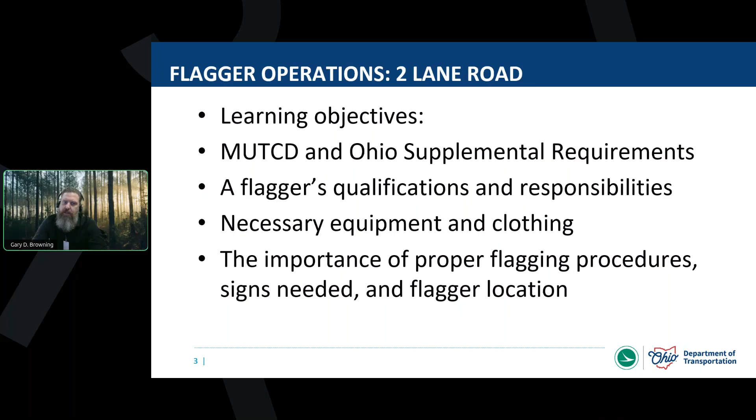All right, today's learning objectives. We want to take some time and we want to look at the MUTCD, the Manual on Uniform Traffic Control Devices, as well as our new Ohio supplemental requirements as it pertains to us working in the roadway during flagger operations. We'll spend some time talking about the flagger's qualifications as well as responsibilities, looking at necessary equipment and clothing that would reference our PPE, and then also the importance of proper flagging procedures, the signs that are needed, as well as proper flagging locations.

We'll look at uniform flagging procedures and how they are applied depending on the type of operation that's being performed. We know that many times in our local public agencies, our two-lane road work can vary from things that are going to be static in one position for a length of time, and sometimes it even moves into moving and mobile operations where we're still deploying flaggers for safety of the road work area as well as the road users.

So we need to have an understanding that there's going to be different things that apply as far as keeping everyone safe. And with that, we want the development of safety habits to maintain safe working conditions for our employees and our motorists around and through our work areas. So with the PowerPoint, hopefully you'll get some insight in how you can help design your flagging operations to be the safest that it can be for different speed limits in your municipalities.

All right, so here we're going to reference our Ohio standards in Part 6 of the MUTCD. The MUTCD and the Ohio Supplemental Manual establish the standards for design and use of traffic control devices on all public roadways in Ohio. And this is going to be per sections of the ORC 4511.09 and 4511.11.

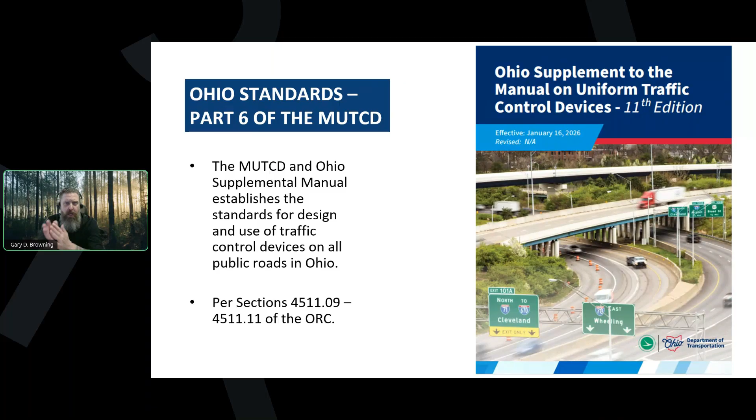As a reference too, we have these manuals available to you for download, and I'll show you that here in just a moment. To reference the ORC, local authorities in their respective jurisdictions shall place and maintain traffic control devices in accordance with the Department of Transportation manual and specifications for a uniform system of traffic control devices.

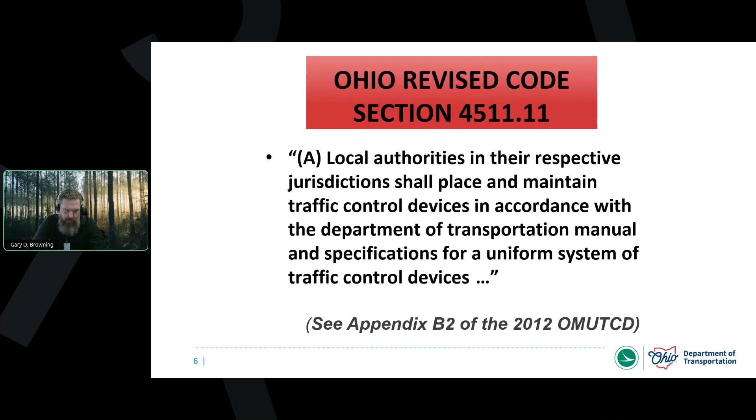One of the biggest things that I have learned through 30 years of local public agency experience is that the big word that's important in there is uniformity. Being able to have uniform work design so that we are all following in compliance with the manual on uniform traffic control devices. So that if somebody is driving through your work zone in your community, and if you drive clear across the country, every work zone that you go through should be the same, to develop the standardization, the uniformity, the control efforts, so that motorists know exactly what to expect, and prayerfully the workers will be able to communicate effectively so that they'll know what to expect.

Within the manual on uniform traffic control devices, there are going to be pictures that are available. These pictures are commonly referred to as typical applications. They're going to be a drawing on a page. They're going to show many different typical applications for all types of work zone environments that you might find yourself in. Anything from single lane, two lane roadways, multi-lane roadways, freeways, and expressways, all in an effort to give you some sort of a plan and an understanding, so that as you are beginning to build your plan for your work zone, it's a starting place for deployment. From there, you're going to start making different types of alterations.

As you look at typical applications, there are going to be many variables such as the location of work, the highway type, geometrics of roadways, vertical alignments, intersections and interchanges, and all the different things that are available. And so one thing we've got to realize is that when I'm looking at a drawing on a piece of paper, it's not real life. And because it's not real life, there's sometimes going to be a necessary alteration that has to be made. What we want to do is to know what the manual says, so that when we're making alterations, our alterations do not put us in a situation to become a violation.

And we've seen that happen many times, unfortunately, throughout the years, where somebody makes an alteration to a work zone. However, the alteration that's made puts them into a situation where there's a violation. One of the ways that this happens most frequently, sadly, is with retroreflectivity of temporary traffic control devices. Let's say that you have a local public agency that sets out to do work during daytime operations. They put all their signs out, perfectly and legally. They put out their taper, they put out their tangent lines, they've got their workspace and buffer space, and everything is exactly specific to what it's supposed to be.

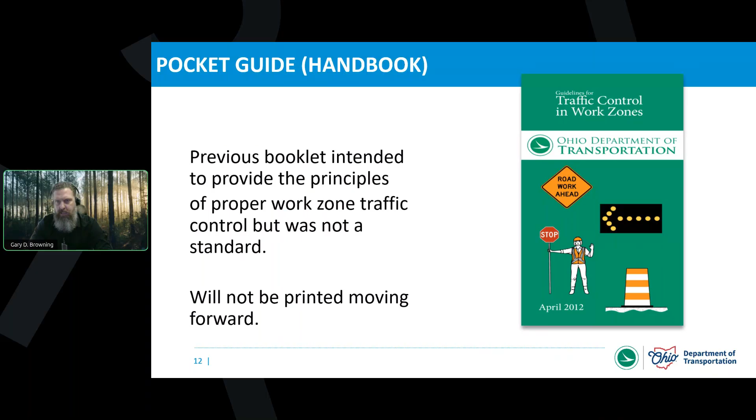This was a nice option, but we've got something that's going to be even better that we have improved, because like with anything that's printed in paper or a little flip book that's going to be in a truck, we know that it stands the chance of being damaged, lost, or stolen. So we've provided a digital resource that I'll talk to you about here in just a minute. So just be advised that these will not be printed moving forward, and the links to be able to print them as well are going to be removed from the website.

But within the book, what we had previously and what has been moved to a digital copy now is devices and tables to show us the different spacing that we need for signage on roadways depending on speed. All the calculations are already done for spacing of channelizing devices, as well as laying out tapers and flagger station distances, so very easily you could look at the speed of your roadway, look at the width of the lane that you're working in, and the mathematical equations were already done for you.

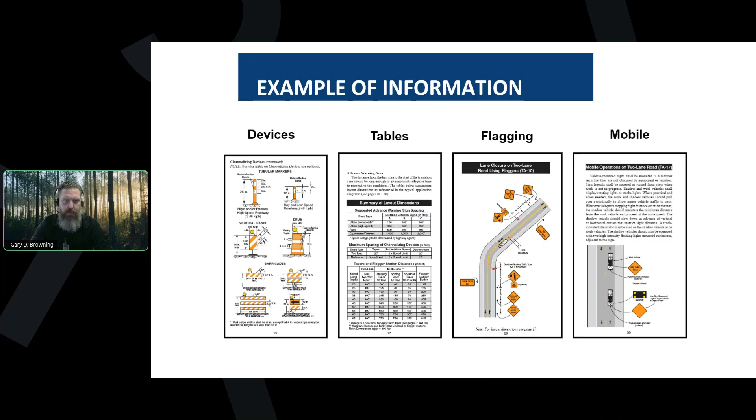Other typical applications were available in this booklet as well. You also had work activity matrices. So if you still didn't know what typical application you wanted to reference, you could reference them based on the work type, and it would show you what the best typical application would be.

There are many apps that are available out there. Because we're talking about work zones and flaggers, this is the one I'm sharing with you now. But we have other ones that are available. One's for sign placement, one's for safe roadways. You can get into the Ohio Department of Transportation's website. They have apps that are available to download. And there are still even more out there. Underground Utility Protection Services have an app. The railroad has an app. These apps are great to put on employees' devices, either a city provided or government provided phone, or even a personal device, because it's always going to be with you, helping you stay safe and informed when you're out there working.

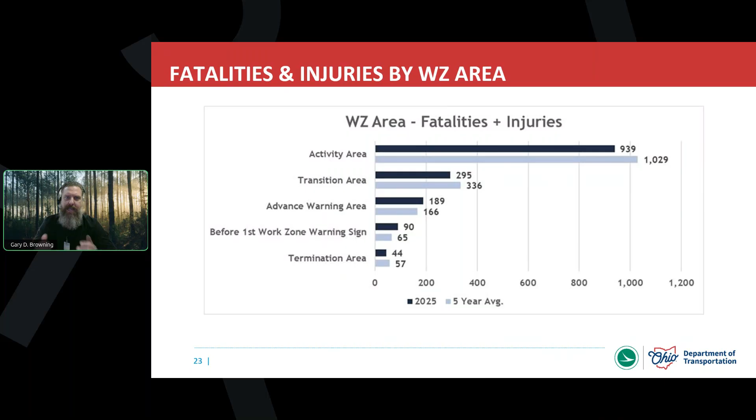We want you to be safe, but remind them to have situational awareness so that their head is basically on a swivel. They're listening, their ears are open, and they're ready to take action to protect themselves, to have an escape route, to be able to get out of the way should an errant vehicle come through the work zone and potentially lose control. It's sad to say, but this activity area is where the majority of these incidents are being recorded.

So what is the main hazard for flagging? We know that as we look across the country, motorists kill about 20 flaggers each year. This is an average number. It's not an exact number, but it should still be a staggering number to us, to remember that this is a very dangerous thing that we're doing. We have got to make sure that we're doing everything appropriately.

Flagging can be very dangerous, especially when you start working with high-speed traffic. You're dealing with angry and aggressive drivers. And there are other things on the roadway that drivers are dealing with, which we'll talk about later in the presentation. After seeing a flagger, a motorist going, let's say, 60 miles an hour is going to need almost 400 feet to come to a stop. So many times, speed of vehicles plays a role in potential accidents happening. So we need to do our best to be safe on the roadways.

For this particular presentation, I went to the website and I pulled out not only what the total crashes were in our state, but also the crashes being recorded as work zone related crashes. So something very interesting if you would like to take the time to go back and have a look at that.

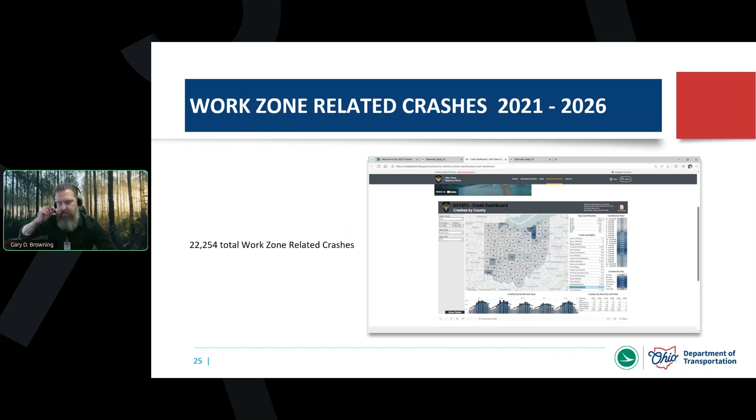All right, let's talk about one crash in particular. If you're aware of who PERRP is, PERRP is the Public Employment Risk Reduction Program. They're basically OSHA for the local public agency. They're going to be imposing the Code of Federal Regulations for different workplace violations. PERRP and LTAP have worked together quite frequently in an effort to get safety, communication, and training out there to our local public agencies.

They were going out to do what I believe was crack sealing, some form of a road maintenance repair. And take a look at the dynamic of the roadway. You have a roadway that has curves to it, it has hills and dips. You have a canopy of trees that's overshadowing the roadway, immediately met with blinding sun.

The crew that was going out to do the maintenance efforts of that roadway, it was maybe a relatively short section of road. They thought, hey, let's just get out, let's get after it, let's get it done so that we can get back to the shop and maybe get on to the next task. So at one end of the roadway, they put up one sign. At the far end of the roadway, they put up another sign. And then they proceeded to have a moving and mobile work zone, if you will, as they went down the roadway doing their sealing project.

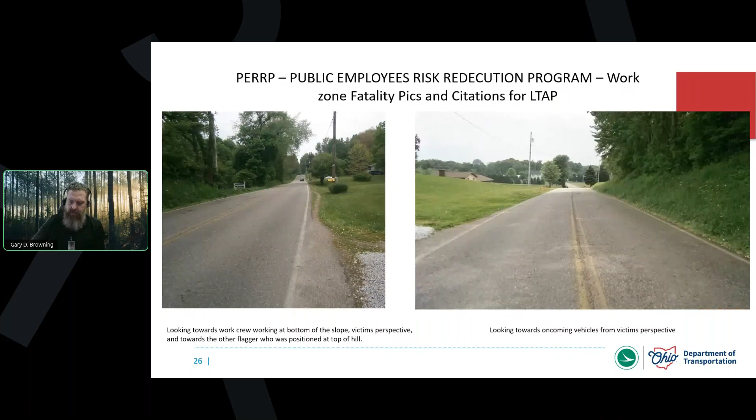So PERRP gets involved and PERRP begins to do their investigation for exactly what happened. As they look into the investigation and they're documenting everything that was reported and how it happened, we start looking at the citation number. We start looking at all the references that were made. And every reference at the time was still the Ohio Manual for Uniform Traffic Control Devices, the OMUTCD, but the same thing is still going to apply today. They're going to go through that federal manual. They're going to go through the Ohio supplemental, and we have to do our part to make sure that we are upholding these things for our roadways anytime that we're in the road working.

As you look through the citation, you'll see the Code of Federal Regulations that is also being quoted, and you'll see what their findings probably were. And so we have to know that it is very important that we have trained employees that can work and be competent persons while they're out working in the roadway, so that everything is safe and legal to try to prevent these disasters from happening.

And this is not to put any shame on any local public agency, such as this one, who had to experience such a hardship, but it should be a reminder to all of us that this is something that is very plausible. This is something that can happen to every single one of us if we're out there and we're not doing what we're supposed to do and we're not staying alert with that situational awareness. All right, let's continue moving on.

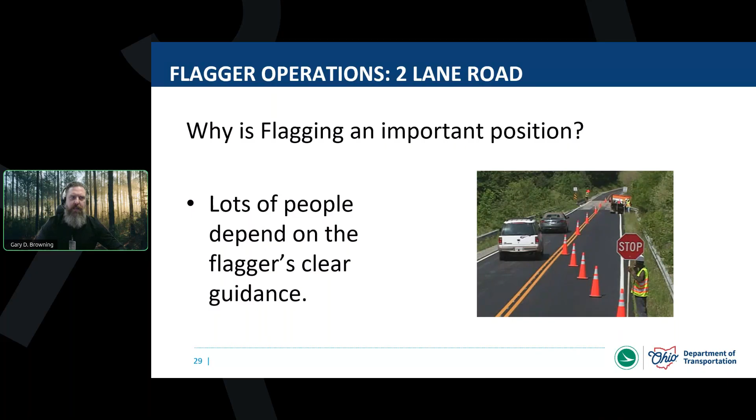So we know that flaggers are going to be very critical to traffic safety, and the consequences of improper flagging may be severe, if not fatal, like we've just discussed. Flaggers have very important responsibilities. Why is flagging an important position? Well, the fact is that lots of people are depending on the flagger's clear guidance. So let's think about those people. You've got the co-workers that are working in a workspace. They're trying to perform whatever the maintenance or inspection operation is.

The flaggers are controlling the roadway. The fellow co-workers are relying on the flaggers to have proper control of that roadway and communication. The motorists that are driving up the roadway are relying on the flaggers' clear and concise communication to keep them safe, to let them know that it's time to stop, that they need to slow down, or that they can be released to travel past the work area. And then we think about all road users, including vulnerable road users, such as pedestrians, such as bicyclists. Many of our communities have the e-scooters and the e-bikes.

And lastly, and not to say least, the flaggers themselves. The flaggers are relying on one another. It is absolutely critical that we make sure our flaggers are trained. The problem is, and I have found this throughout my 30 years of experience, that many times the maintenance road members do not like to flag.

So the fellas and the ladies that have all the experience, they have the wisdom and years and training, they choose that they don't want to flag. So then who gets stuck flagging? Well, typically it's going to end up being that new person that just got hired in that may not have even been trained yet. It's going to be that college intern. It's going to be that summer seasonal. It's going to be that brand new full-time employee. They're going to get handed the flag paddles and say, you're going to be the flagger because you don't know how to do this other part of the task just yet.

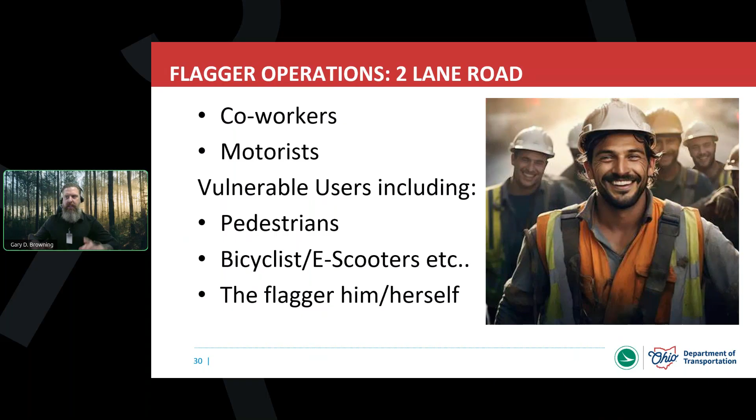And we have to understand that we are in great violation by doing that, because just look at the fact that we're all relying on them. If I'm in that work area, I am relying on those flaggers for my own safety. And if that flagger that I'm relying on has not yet been trained and is not knowledgeable themselves, now I've put myself at risk. So let us make sure that we see the need to do that, that flaggers absolutely must be trained.

Now, as we take the time and we go through and we look at our Manual on Uniform Traffic Control Devices and we look at the flagging procedures, we're going to find those standards. And there's many things that are going to be bullet pointed in there. So let's just take a moment to look at some of these and what a flagger must be able to do. So we know having flaggers out there and following these procedures is going to increase motorist respect. It's going to promote a uniform response. Remember, we talked about when we read through that Ohio Revised Code. It's that standardization. We want that uniform response, and we want to do our best to try to minimize drivers' confusion on the roadway.

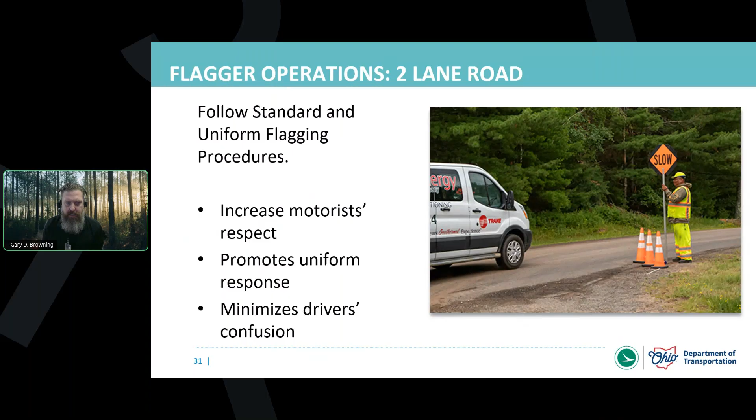Flaggers must stay alert at all times. Flaggers must face oncoming traffic. They must be highly visible. They must stand alone, and they must stay on the shoulder. They must stay out of the path of other vehicles. Now, you can probably admit there's times that maybe you've been driving down the road and you've approached a work zone and you've had flaggers that were controlling that roadway, and you probably have seen almost every one of these things being violated. And that's the problem. Those are the things that we've got to communicate to our workers so that they're not.

They've got to stay alert at all times, being in control of that roadway. It's very easy to get complacent, especially maybe on a roadway that has low traffic. And so their mind starts to wander and they're looking around at the environment, but you have to stay alert. Many times we'll find flaggers that are standing at different locations on the roadway and not necessarily on the side of the road where they're supposed to be at, not facing the oncoming traffic. Maybe they're out there and they're not wearing the proper ANSI garments for that roadway. We're going to talk more about that with ANSI Class 2 and ANSI Class 3.

Or we'll find our flaggers that they'll be standing right up with that work area. They'll be standing right up against a pickup truck or whatever type of mobility vehicle that they use to be out into that work zone. The flagger has to stand alone so that they are completely separate and being visual and being seen. They must stay on that shoulder and they must stay out of the path of the roadway from that vehicular travel.

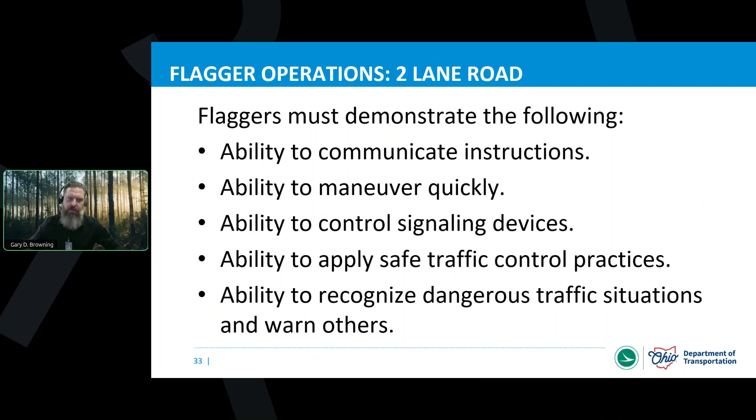So why would we take a brand new summer seasonal, a college intern, that brand new full-time employee that has not yet been trained to have a clear understanding of flagging operations in the MUTCD, put them out in the roadway to control that roadway when so many people are going to be relying on them for their safety as well as the flagger being safe. I hope that you're starting to see the importance of why we have to have proper flagger training.

When we start talking about flagging equipment, primarily we know we're talking about our stop and slow paddles. So you have stop and slow paddles that need to be retro-reflective, especially for anything being used at nighttime. Now there's two sizes of paddle that's available. The minimum size that you can use is going to be an 18-inch by 18-inch.

There are larger paddles that are available, such as the 24-inch by 24-inch, and typically these are going to be mounted on a high rigid handle, usually 5 foot to 7 foot high. The manual would say that, the sign being mounted to a post support, it needs to be high enough so that the approaching vehicles can adequately see it so that they are getting that communication.

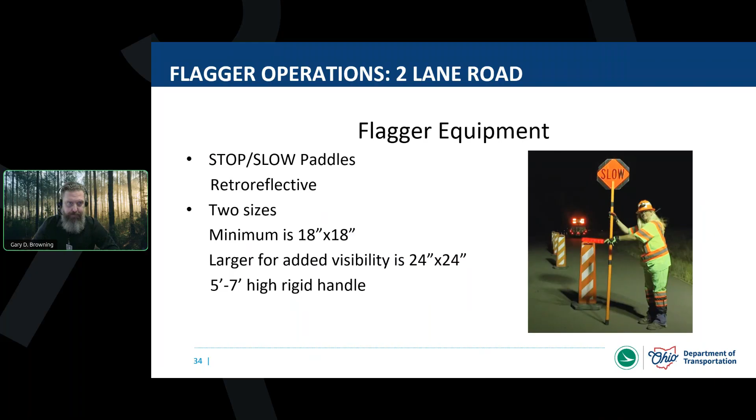When we look at our stop and slow paddles, because we were talking about uniformity and standardization, notice the stop sign. This is a regulatory stop sign. It is an enforceable stop sign.

So I always tell my folks that if you're out working and you're having problems where the motorists in the community are not obeying the flagger controls, they're not obeying the stop sign, to make a phone call to that local public agency, the police department, maybe the local sheriff's deputy, and ask if somebody can come by and maybe just sit adjacent to that work zone, because this is absolutely a regulatory stop sign.

Now look at the uniformity and the standardization of the slow side. It's going to match up just like all the other requirements that we will have with our temporary controls and our advanced signing. So you have that orange diamond, you have the bold black letters, all in an effort to be as visual and communicate as clearly as possible to motorists.

Well, what about using the old school flags? Many of you may have some of these still laying around. You may still be using them, but here's what we find with our update, with our new manual. The use of these flags should be limited to emergency situations only. We need to start making the effort of operating with stop and slow paddles alone.

How about channelizing devices? When we start talking about our channelizing devices, we're primarily talking about anything that we're using to help us control that traffic. So this might be your cones, you might be using grabber cones, you might be using some form of a panel or a barrel. But our channelizing devices direct traffic from one lane to another. They guide travelers along a safe path.

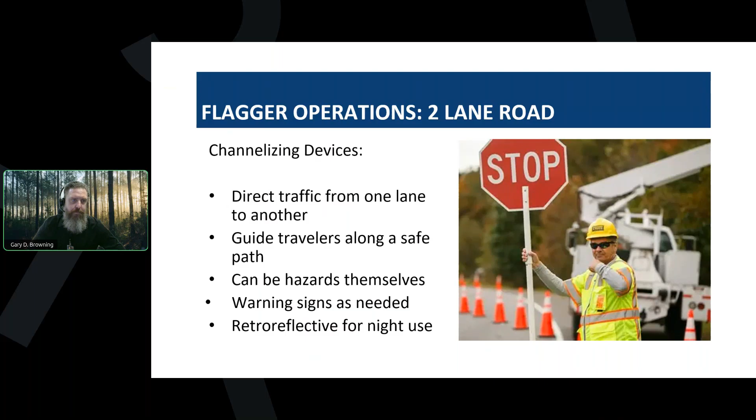Now a long time ago, it used to be known as ANSI Class 1, ANSI Class 2, ANSI Class 3. Well, now the previous ANSI Class 1 is no longer permitted to be worn in or around the roadway where there's vehicular traffic. It's only allowed to be worn indoors or in controlled environments.

So now what it's considered is a non-rated. A non-rated article of garment is no different than you wearing anything else that you're wearing to work that day. Those vests can no longer be worn in or around that roadway. So what do we go to now? Now we see that we have an ANSI Class 2 and we have an ANSI Class 3.

ANSI Class 2 garments, if you look at the difference compared to that previously rated Class 1, look at how much more retroreflective material is going to be on the employee that wears it. The previous vest, they had no retroreflective material on the sides of the wearer. It was just a little elastic strap that kind of kept the back and the front together. But now you actually have retroreflective straps to go all the way around your side. So if you're standing sideways in the roadway, an approaching vehicle still has an opportunity to see something reflective on the worker who is wearing it.

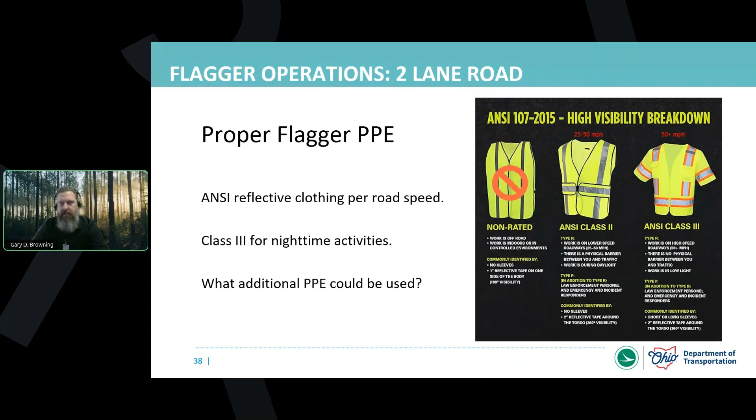And I'm sure there's still many more things that we could add to this toolbox, but I encourage everybody to put something together like that, just in an effort to promote even further safety for the road user, the road worker. So let's get back and remind ourselves about the clothing that we were talking about with our safety apparel.

We're talking about ANSI Class 2, ANSI Class 3. Now, many of you may only have ANSI Class 2 garments available. It's all that you've purchased and it's what you have. Remember, those Class 2 articles are only good for daytime operations, less than 50 miles an hour. Class 3 is going to be required anytime we're working at nighttime or we're working at speeds that are above 50.

So you may be asking yourself, well, what am I going to do? How can I make my Class 2 article, my Class 2 vest or t-shirt or whatever it is that you have, into a Class 3 rating? Well, we've got an answer for that. Many of you might be buying high-vis rain gear. You got a high-vis jacket, you got high-vis pants. Putting on those high-vis rain pants, if they carry an ANSI rating, is going to get you into Class 3.

They also make what's called a highway pant. Highway pants are kind of a cheesecloth material. They're still going to be in the fluorescent green or the fluorescent orange color, depending on what you're purchasing. They will have retroreflective banding that is sewed into them, and they are going to carry an approved ANSI rating so that you can then make that Class 2 vest all of a sudden make the employee have a Class 3 rating.

They're also making what's called a high-vis gaiter. For my outdoorsmen, you know what gaiters are if you're going into the woods and it's warm out and you're protecting your legs from potential venomous snake bites. Well, they're making gaiters that kind of look like that. They're elastic. They're made out of that cheesecloth. They'll be the high-vis fluorescent color. They'll have retroreflective material sewn into them. Elastically, they'll go up to your knee and hang down over your boot. Wearing something that's approved like that is going to make a Class 2 vest all of a sudden become a Class 3 rating for the employee.

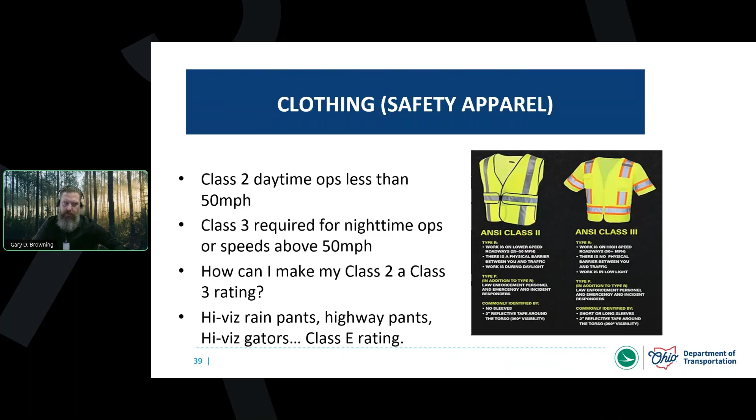What's the problem with things? Well, we know that we go out in the marketplace and everybody is selling construction garments nowadays. You can go to any TSC and Rural King and Meijer and Walmarts, and every place you go, you can probably find some type of high vis garment. The problem is not all the garments that are high vis are going to carry an ANSI rating. They're not going to be ANSI compliant.

So you take a look at the articles of clothing that are on my screen right now. Which one do you think is an ANSI rated garment? Which one might not be? It's hard to tell. So how do we know? Well, the idea is going to be for you to go look at the tag on the garment. If you look at the tag on the garment, sometimes they're sewn in at the neck. I've seen them sewn in at the sleeve, maybe on the stitching down around the waist where you would tuck your shirt in at. You're going to find this tag just like you see in your picture today.

You're going to see the ANSI federal rating. You're going to see that 107. And then it's going to show you what the classification is for that garment. So this particular garment that's pictured is going to be a class 2. So think about it. What did I say class 2 is good for? Daytime operations only and speeds less than 50 miles an hour. This particular garment also has an expiration listed on the tag that says that it's good or guaranteed up to 25 cycles, so 25 washes.

Now, does that mean that I have to throw these shirts away after every 25 washes? Not necessarily, because it depends on what the work is that they're doing, how hard they are on the garment. Some tasks are very dirty and they're very arduous, and you may go through t-shirts and garments much faster. Some are very clean, and you may be able to get more than 25 cycles out. But the point that I want each of you on the webinar today to hear is that they wear out. So there's going to be times where you're going to have to replace your articles of clothing. You're going to have to get a new vest.

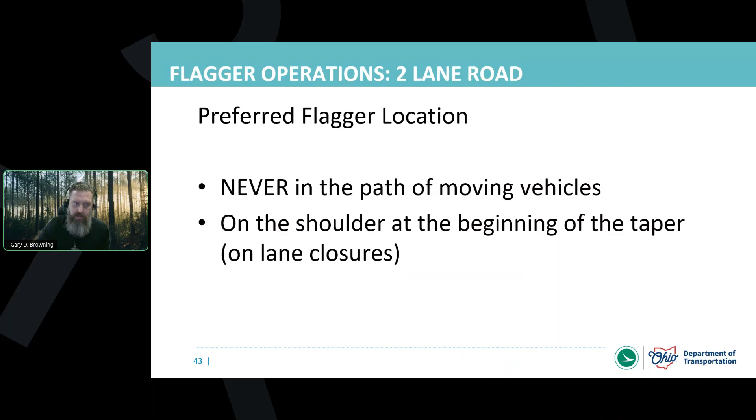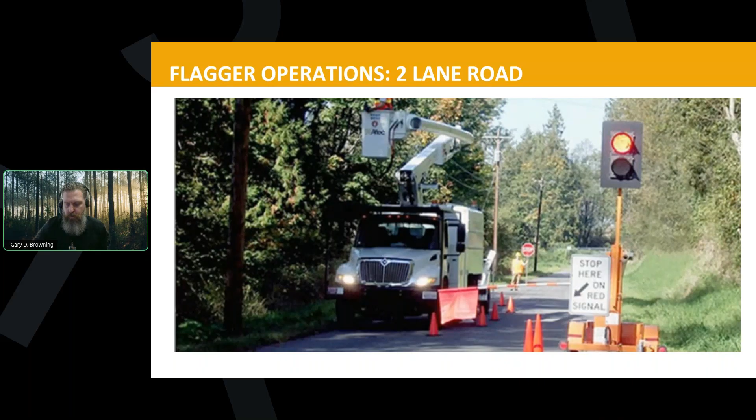So there's lots of resources that are out there available for you. I encourage you to look into what's best for you. All right, so we're talking about our flagging locations. Let's first look at some examples of how not to flag traffic, and not to poke fun at anybody, but some of these are pretty fun pictures to look at. But I want you to think about the things that we've already discussed, what the manual says that we shall do when we're out in the roadway, and then start thinking about some of the violations and the potential incidents that could happen to these pictures.

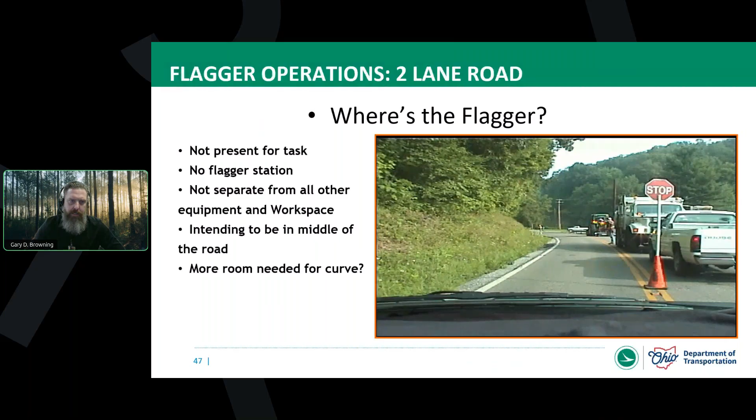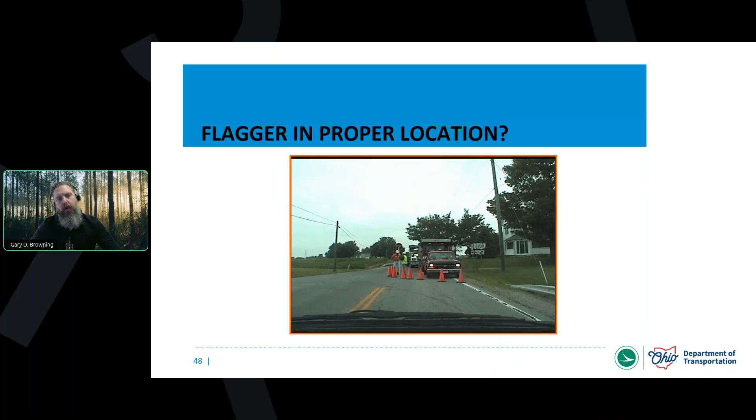And now you have a flagger wearing a legal ANSI Class 2 vest. They've got a stop and slow paddle, fiberglass pole. Those things are great. But then somebody comes out and says, "Come here, I need to talk to you for a minute." And now they pull the flagger out of their safe location on the edge of the roadway prior to the taper. And now the flagger is actually standing in the work area at that taper. This is a violation, and this could potentially make the roadway unsafe, not only for the workers and the flagger, but also those approaching vehicles.

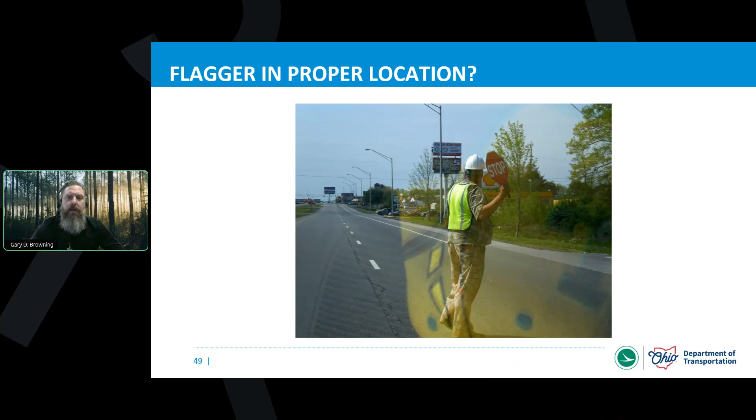How about this location? Do you guys think this is proper? I mean, he's got a lot of good stuff going on, doesn't he? He's got his hard hat on, he's got safety glasses on, so if something happens, he's not going to lose his vision. He can see very well. He's got a stop and slow paddle. It's the 18-inch. It's on a plastic handled pole, so it's up high where it can be seen. He's wearing a class 3 ANSI vest. Man, that's his good stuff, right? He's got a lot of good things going on.

But now look at the position and look at what we're dealing with on the roadway. The employee is standing next to a vehicle. Remember what we said. You have to be standing alone, separate, away from all other vehicles, on the edge of the roadway, not in the roadway. And now look at the type of roadway he's working in. He's working on a multi-lane roadway. And just like I shared a moment ago, if we're working on that multi-lane roadway, we should be using devices. Now I look for his devices, and where do I see them? I see them sitting there on the back of his truck. So why are they on the back of the truck and not out on the road properly controlling the traffic? So a lot of times we have the things that we need. We just have to make sure that we're using them.

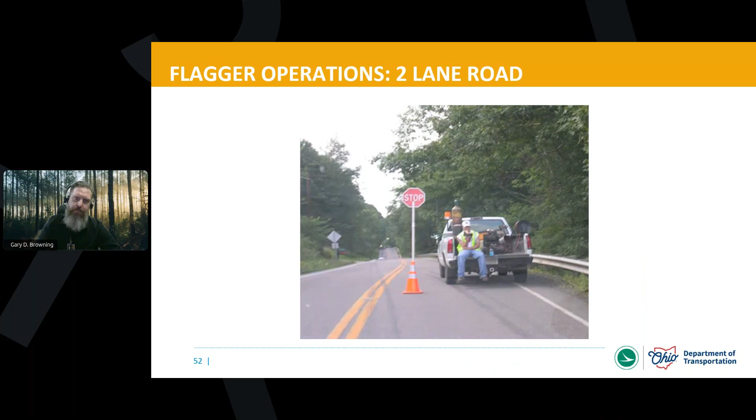Time check. Thank you, Kara. You're welcome.

Here's what I want to tell you. Remember your flaggers when you're out there. If your flaggers are on the roadway and it is excessively hot outside, remember to give them a break. Let them cool down and get hydrated. If they're on the roadway and it's incredibly cold outside, there's going to be a time where you should be having somebody give them a break so that they can get in a vehicle, they can warm up before they go back and take their location.

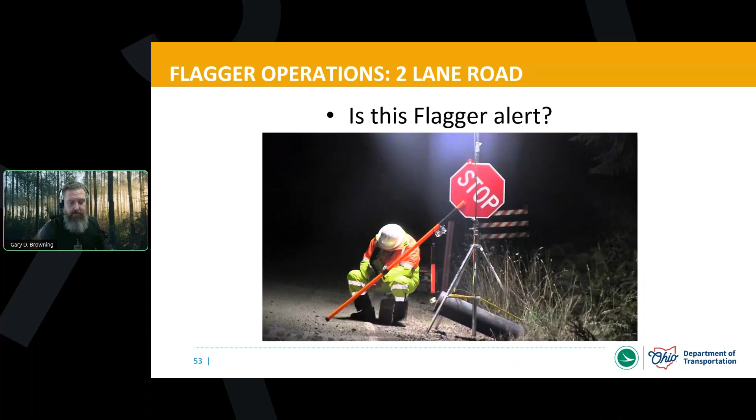Give them the breaks that they need so that we can all work together to be absolutely as safe as possible. Remember to follow the standards for uniform flagging procedures like we talked about. Doing these things is going to increase the safety, it's going to keep us legal, and it's going to increase that road user's respect.

Well, I know it's a long time for us to all stay together and sitting still. Why don't we take a pause? We'll take a 10-minute break, give you the opportunity to get up, go do anything that you need to do, get some coffee, check your email, and we'll meet back here in approximately 10 minutes.

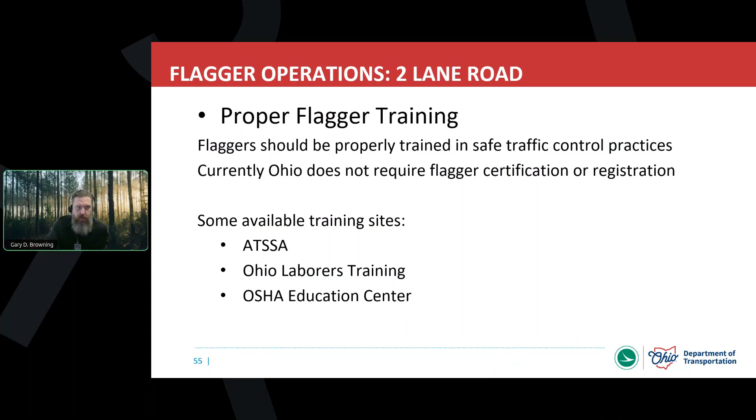Now, when it comes to proper flagger training, we know that flaggers have to be properly trained in safe traffic control practices. Currently, Ohio does not require flagger certification or flagger registration. However, there are some private companies that do, and there are also opportunities out there if you would still like to seek that out. Some available training sites would be ATSSA, the Ohio Laborers Training, as well as the OSHA Education Center. So we definitely have opportunities out there if you would like to search out additional training on these topics and registrations and certifications.

Now let's talk about motorists that are in our work zones. We know there's lots of things that we're dealing with out on our roadways when we're trying to conduct our inspection and maintenance operations. Many times, the drivers that are coming through the work areas are very tired, they're distracted, they're rushed, they might be angry. The flagger must get their attention to guide them through the work zone safely and to protect the fellow workers. But we know that controlling drivers is very difficult at times.

Drivers want to make their own decisions. They want to be in control. They have their own expectations. They left the house. They've got a point A, they've got a point B and a time frame to get there. And we know that work zones are going to be more prone to those crashes. And they many times think that flaggers are just in the way. But all along, the flaggers are trying to control that roadway and provide that safe communication for all road users.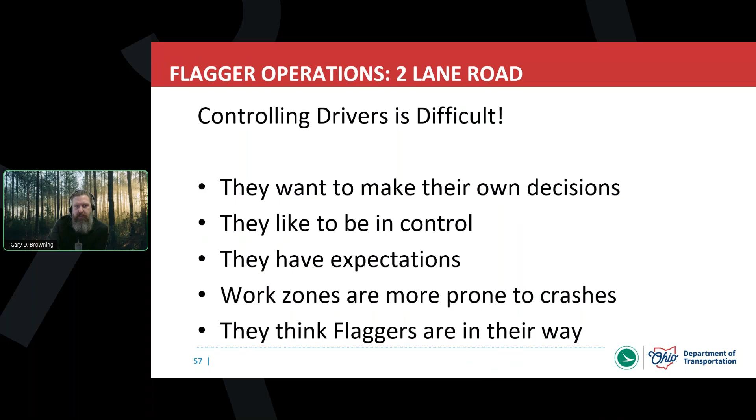We also know that there's other factors that affect the road users' abilities while they're out driving. You think about weather and environmental concerns that we all face. You might be driving in the rain, it might be very dense fog, driving in snow and sleet and ice. Hopefully, we're not out there having to flag traffic in a snow and ice event, but there is the potential for things to happen at times. So, weather and environmental concerns are absolutely something to take into consideration with the work areas and the approaching drivers.

Even in the fall time, you've got the leaves falling. Leaf debris gets built up on the roadway. The leaf debris can get very wet, and that can get very slick and prevent the ability for a vehicle to stop very, very quickly in the event that they needed to. You have drivers' experiences or lack thereof.

Talking about our youth, kind of a funny joke. When I was growing up, my dad had a sign that he hung in the garage and it said, hire a teenager while they still know everything. But that's kind of the truth, right?

Our young drivers, they think they know it all. They can handle this. And they get out there and they go after it pretty hard. And that could be a concern for work zones. You also have driver's age. Many times with some of the senior drivers, and I'm fast approaching that, it can be a problem. Eyesight, reaction time, and those things start to diminish.

You also have operator vulnerabilities. There's lots of vulnerabilities that are out there on the roadways, maybe concessions made to vehicles so that they can still have that freedom and that ability to be out. But these are all things that you have to remember, that everybody's dealing with things.

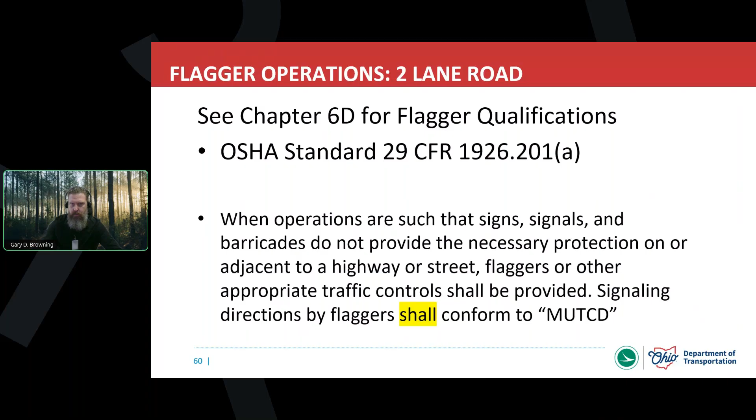We need to know our ABCs of proper flagging. A for advance warning, B for be visible and be alert, and then also C for control. And these are the essential aspects of any flagging operation. And just as a reminder, as we talked about before when we looked at the actual stop and slow paddles, flaggers have the same ability to control traffic as signs and signals do, and they have to be obeyed. So you have a regulatory stop sign.

If you're doing everything that's safe to control that roadway and you're having problems with motorists that are not obeying your controls, I always encourage everyone to reach out to their local police department, reach out to the local sheriff's deputy and see if they can put somebody near the work zone just in an effort to help you control it to keep you safe.

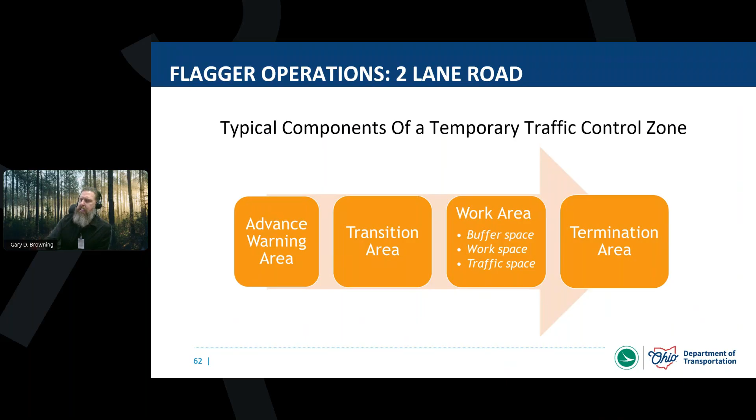All right, let's talk about the typical components of a temporary traffic control work zone. Now, these areas are going to be the same whether we're dealing with multi-lane or two-lane. We're going to have an advance warning area, and then a transition area. We'll have our work area, which includes the buffer space and the workspace. The traffic space is the intended area where we want traffic to be able to pass the work area. And then at the end of your work zone, you're going to have the termination area.

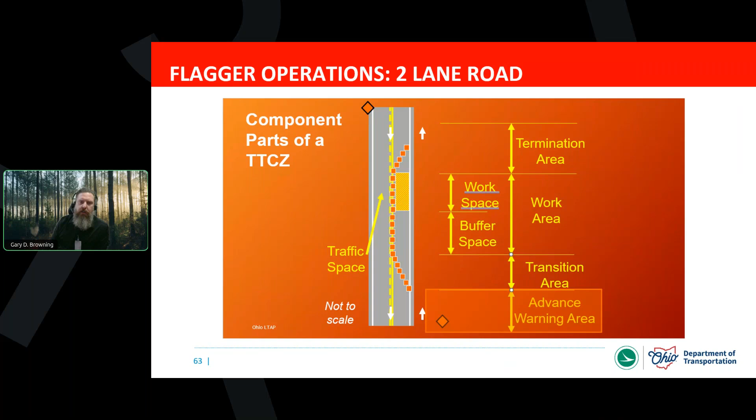So here we see it drawn out on a roadway in a two-lane fashion since we're discussing flagger operations. We see our advance warning area, and this is what we're going to discuss first. This is the placement of advance warning area signs. With this advance warning, it's very important to make sure that we have them out there. This lets the public know that you're there, that they're going to be approaching a work area.

And the signs need to be installed before you start your flagging operations. So we go out, we decide where the signs have to be. We set the signs up with the appropriate spacing for the speed of that roadway. We get our signs set up and then we begin the flagging operation. And as a reminder, everything at nighttime has to be retroreflective for nighttime operations.

Examples of your temporary traffic control signage: our very first sign is going to get the driver's attention, to let them know up front that they're getting ready to approach something. You might have a workers ahead sign. Your sign might say utility work ahead. It might say road work ahead. There are many approved variations of this first initial sign. Whatever you have, this is the sign that goes out first to get the driver's attention.

The next sign that you're going to put out tells them what the problem is, and then we tell them what we want them to do. So our next sign could be a variation of lane closed ahead, or one lane road ahead. There are a couple of different signs that your communities may have, but this is the second sign going out. We're telling them what that problem is.

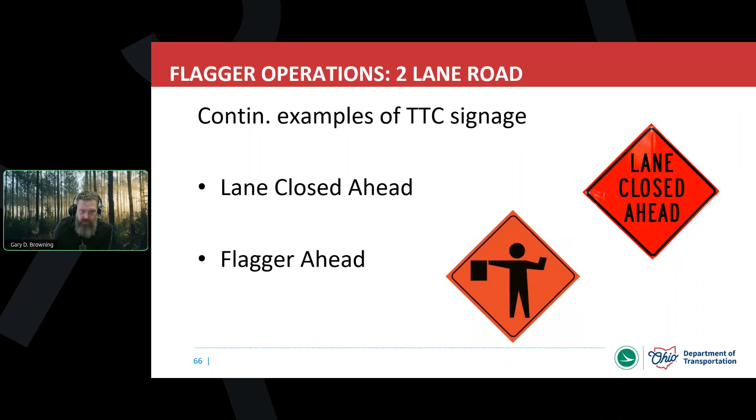And your third sign is going to be your flagger ahead sign. Sometimes it could be a text sign that actually reads flagger ahead. Many times our communities are now moving over to symbol signs because a symbol is easier to understand, especially if someone struggles to read English. So having a symbol sign is very effective. We're telling them they're approaching a work zone, what the problem is, and now what we want them to do, and that's obey the flagger.

There's a fourth sign that you can also use in your deployment of advance signage, and that's the be prepared to stop sign. If you're on high speed roadways, you could place this sign 1,000 feet before the flagging station. In typical applications it's listed as optional. But just because something is listed as optional doesn't mean we don't do it. It's still highly advisable.

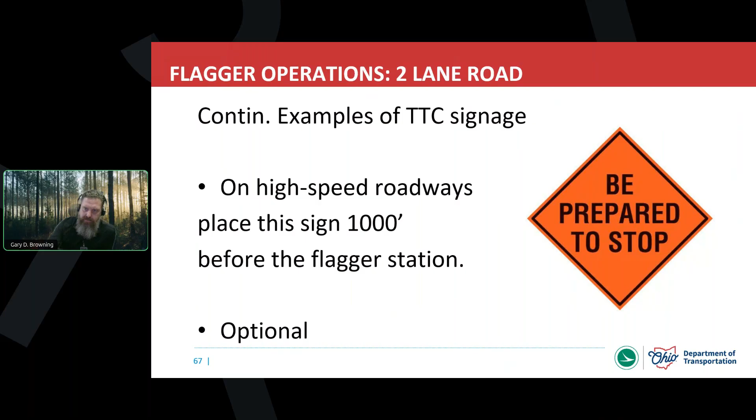If you're working on roadways with high levels of traffic, very busy, high speeds, with curves, dips, and hills, putting out a be prepared to stop sign advances the level of safety by letting motorists know they're going to be brought to a stop or a queued line of traffic in an area that may never have queued traffic, where they may never even think about stopping. So adding this fourth sign is a very safe addition to your sign deployment.

Something we can do to help our signs be more visible and communicate even more effectively is placing a reflective cone next to each temporary traffic control sign. Many times there are flags made that can go on top of your signs. If you have the flags, putting them on is advanced communication. Not all signs will have them, but if you have the ability, do it. We know there's a problem: our signs on the roadway are competing for the attention of the motorist with everything else that's out there.

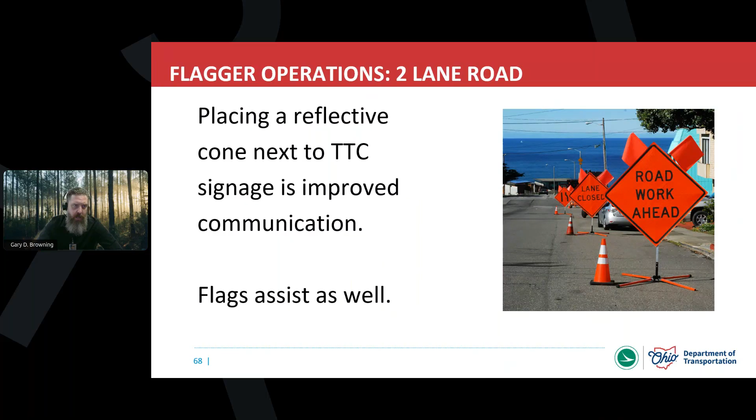All the other existing signs that are on the side of the roadway, whether they're regulatory or guide signs, signs that are giving directions. It could even be the for sale sign or a garage sale sign or beautiful scenery like the picture on the screen now, looking out and seeing, let's say, Lake Erie, that our signs are going to be competing with for that driver's attention. So something as simple as putting flags on the signs, and if you don't have flags, you can actually put retroreflective cones next to your signs, all in an effort to have better communication.

Our advance warning sign spacing when we're putting our signs out is prescribed by the MUTCD. When we're looking at low speed roads, 40 mile an hour or less, we're going to see a range from 100 to 350 feet apart. When we start getting to higher speed roadways, we start getting into our rural roadways. Now we're getting up to 500 foot or more, especially when you start looking at multi-lane, freeways and expressways. The distances become very far.

And these distances are prescribed all in an effort to give the motorist the time to see the sign and then to be able to respond to it. So they see that they're approaching a work area, they see what the problem is, and now they're reading the sign that tells them what they have to do, like in this situation, that there is a flagger ahead. So make sure that you reference the guide, and we'll show you that here in just a moment.

And these are some of the different types of changes that you can potentially make to a work zone. Now, let's say I'm in a low speed area and my chart tells me that I only need my signs to be 100 foot apart. But I know for a fact that everybody on this roadway is running in excess of the speed limit. Maybe the posted regulatory speed is 35 mile an hour, and you're pretty accustomed to everybody running 45. You can opt to take the larger spacing if you have the ability to do that, making that adaptation to your deployment.

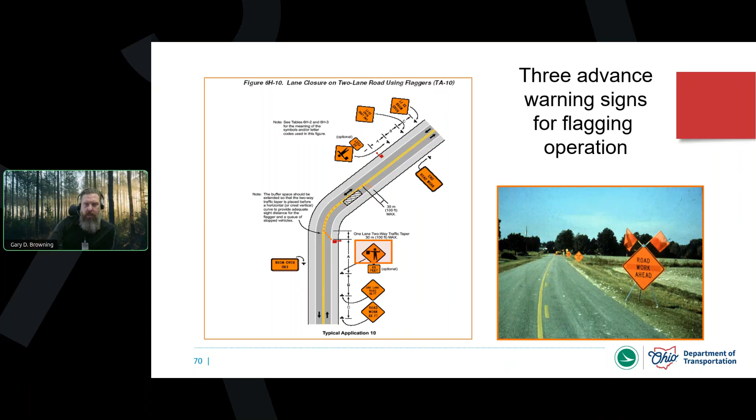And remember, with these typical application drawings, you're going to have several things to read. It's going to go through standard, guidance, options, and support information. Here's the table that has been recommended. It is updated here out of our new supplement and the new 2023 MUTCD. Notice that it shows the road type. We have urban low speed, urban high speed, rural roadways, and freeways and expressways.

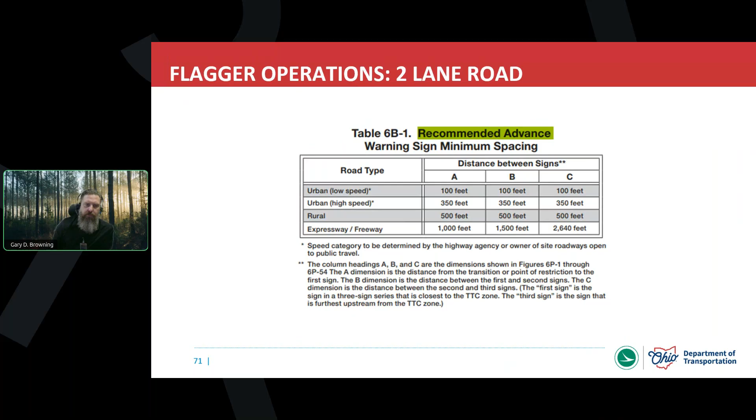Across the chart, you're going to see the distance between signs, distance A, B, and C. That A, B, and C corresponds with that drawing where I showed you A, B, and C. Now, if I'm on low speed, that's going to be 40 mile an hour or less. I can opt to do the 100-foot spacing. Then you have urban high speed. That's going to be above 40 mile an hour, so let's say 45 and up. And then we get to rural roadways. We're going to be 500 foot across the board. Freeways and expressways are going to give you the spacing for the signs there as well.

All right, we were doing our ABCs, and now we're going to move on to B, being visible and being alert. We need to make sure that all the road users see you. So we talked about the proper PPE. We talked about the things building our toolbox. What are the things we can do? These are things that are going to be very important for you to have and make sure that you are abiding by the regulations with it: having proper clothing, having proper signage, having proper PPE.

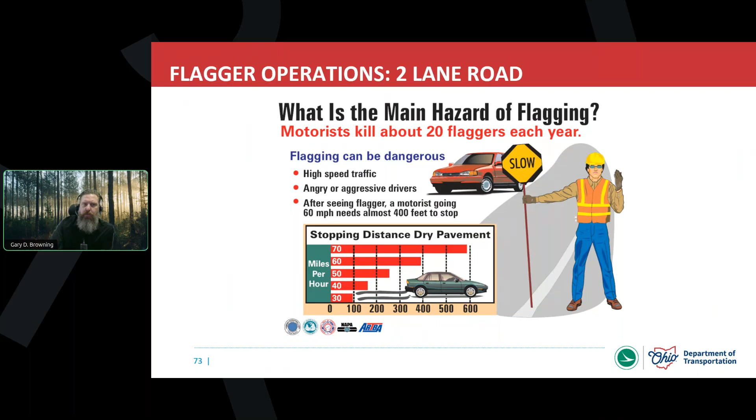Remember, like we shared previously, that there are about 20 flaggers that are killed each year. Many times speed comes into play with that. We'll also talk about how sometimes it could even be the type of roadway that we're driving on. But it's very imperative that we take this seriously and we are doing everything appropriate. Just like we talked about with the TA10 looking like a curve, maybe pretending that it's an actual hill, always think about the placement of your flaggers.

Where's the flagger going to be at? If it's a stationary job, you pick out those most safest locations for your flagger location to be set up at. When you're dealing with hills and curves, you always need to be in advance of the hill, be in advance of that curve. If you're in a moving and mobile operation that you're flagging, there may be times where that tangent area is going to get very, very long for the flagger until the approaching driver actually gets up to where maybe the work area is as the work area is moving up the roadway, because the flagger is still going to need to abide by that.

You wouldn't want the flagger, notice the very first little drawing says okay, notice that the second one says no. If we were in a moving and mobile operation, I don't want to move ahead and put myself in the position of no. I still need to maintain adequate distance and stay back where it's going to be okay.

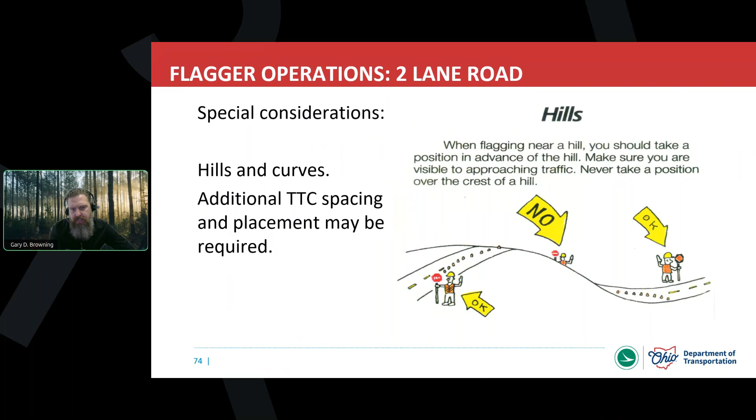Remember, our stopping distances can vary greatly upon the conditions of the roadway that we're in, in addition to eye lead time and the reaction time and effective braking of an approaching vehicle. Many vehicles from 2 wheels up to 18 wheels are going to have different stopping distances. So it's very important that we're setting up ourselves in a position that they can see us before they approach us. Think about the conditions of the roadway.

If you're out working on a township roadway that maybe just got freshly tarred, got chip sealed or something like that, tar and chip, that aggregate that's loose on the pavement surface is going to cause them to need more stopping room, more notification room, as compared to maybe working on something that's a fresh mat. So there's lots of things that kind of play into that.

And then when you start adding the environmental side, is it ice? Is it sleet? Is there packed snow? Is the pavement just wet? There's lots of things that come into play with that. So when you're deploying out your plan for what your work zone is going to be, take these things into consideration for additional safety.

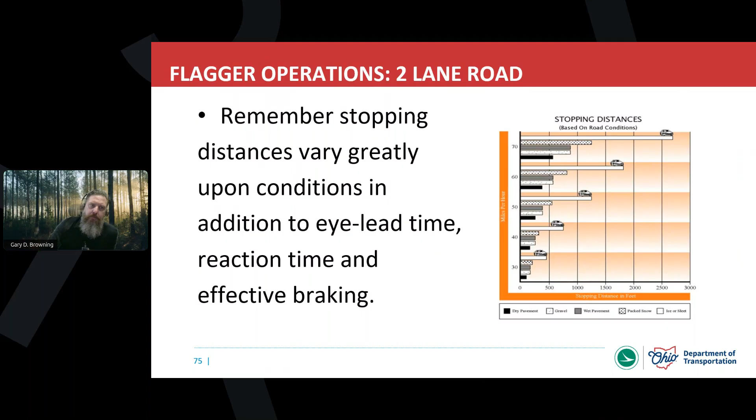We talked about our PPE, and this is just a real quick reminder again. This is part of being visible. Make sure that you're wearing the proper PPE, the proper ANSI garments for that roadway. If you have further questions or you'd like to learn more about that, reach out to me in email and I'll try to answer your questions for you.

But again, as a reminder and a review, ANSI Class 2 is going to be daytime operations only from about 25 to 50 miles an hour. Anything over 50 is automatically going to be Class 3. And if we're working at nighttime, we're going to be in a Class 3. We also discussed how we could upgrade a Class 2 article to become Class 3, and that was by utilizing any approved Class E garment. We talked about highway pants, we talked about high-vis rain gear, we talked about the gaiters. There's things that are out there that are available. Make sure that you're operating compliant.

C for control. So we have to remember that the flagger is considered a legal traffic control device and they have to be obeyed. And with that, flaggers, conduct yourself accordingly. Be professional, be responsible, be attentive, and be alert when you're on that roadway.

You're not only representing that local public agency that you work for, so you need to be very professional in that, but also for the respect of that road user so that they will take you seriously and they will pay attention even further. So conduct yourself accordingly, realizing the seriousness of this.

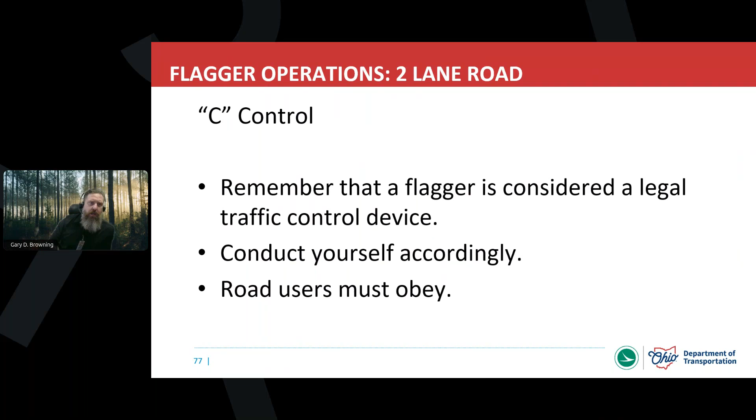So we talk about control by cone taper placements. We know that when it comes to tapers, if we're working on multi-lane roadways, the tapers can get very, very long, depending on the speed of the roadway, depending on the width of the lane that the traveling public is in. Your taper distances can get increasingly long, and there's an entire table that's built around that I showed you at the very beginning that you get when you download the actual work zone app to your phone.

But when we're talking about flagging, we are not going to use that table for flagging. We need to have shorter tapers because the shorter tapers are going to discourage drivers from moving into that open lane. Think about it for yourself. When you've been driving down the roadway and you're approaching a work zone, maybe it's a multi-lane roadway, and that taper just kind of meanders on and on and on. It's very, very long. It almost gives you that initiative to just go ahead and take the merge. We don't want drivers to feel that when they're coming up to a flagging location.

We want to do our best to try to get them to slow down, come to a stop, preventing head-on collisions if possible. So shorter tapers with our cones closer together are going to be more effective. What we want with a taper set up for flagging operations is a minimum of 50 feet to a maximum of 100 feet. And the spacing between your cones is going to be 20-foot maximum spacing. So you're talking about a very short, very abrupt taper to get control of the traffic that is approaching.

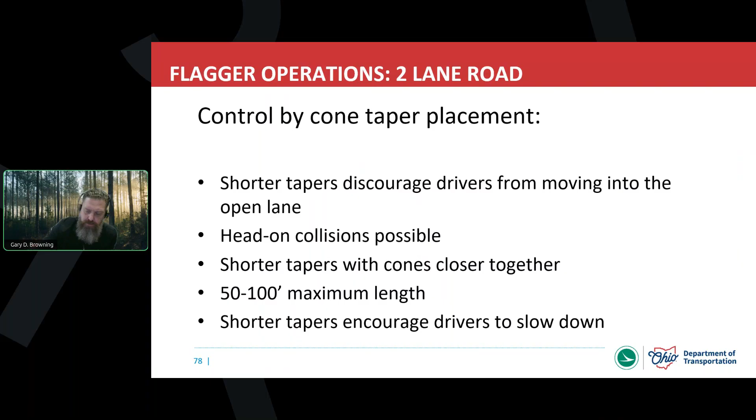For it to be an appropriate buffer space, it's got to be free of all other things. There's no parked vehicles in it. We're not storing equipment. We're not storing supplies. We don't have a debris pile or spoils pile that's sitting in it. This is going to be a completely open area of pavement.

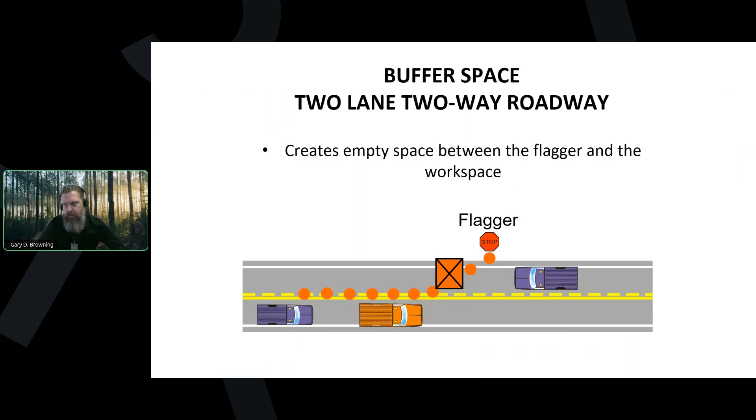So now this purple truck driving up the roadway that may have been distracted, that missed the advance warning signs, now they have to come to a complete abrupt stop immediately. They're not going to stop fast enough to not end up in that actual work area, striking the work vehicles, striking the people that are working on foot. Remember the article that I showed you, the diagram that showed how many of the fatalities and serious injuries were happening in the work area? This is why the buffer space is so important, because it's going to give that time for a vehicle to be able to recover and to keep you and them safe.

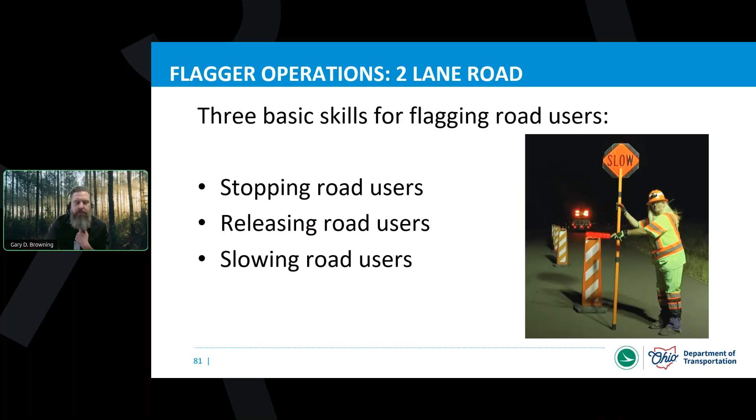Three basic skills for flagging our road users. So as we look into the manual, it would identify these, that we have to do it. And remember what we said, that if we're going to be using flaggers, the flagger controls shall, not should, but shall be corresponding with the MUTCD. Those controls are going to be stopping, releasing, and slowing our road users. So as we look through the manual, we'll see some diagrams that have it actually drawn out, showing you what is required. There are some updates to that. So let's move on to what we have here to show you the update.

So we know that we're going to stand on the shoulder of the roadway. We've said that repeatedly already. We're not going to be flagging from standing out in that actual lane of traffic. Now if you have your taper that's out, you have your flagger standing on the edge of the roadway, the flagger is to be alert and to be facing the traffic at all times to have that proper communication and control.

Now that you have traffic that has approached you and they have stopped where you want them to stop at, and let's say now you have a line of traffic that is queued. Now, if the flagger would decide to step out into the roadway so that the approaching traffic could still see that stop paddle much easier, then the flagger, if they choose to, could now step out into that lane, but they don't have to. The safest place is still always going to be on the shoulder of that roadway.

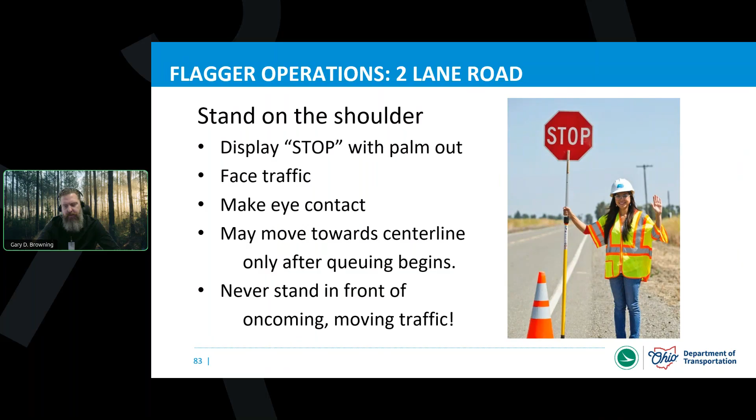So now we're going to move forward and we're going to look at releasing our traffic. So as we would release our traffic, we're going to remain on the shoulder of that roadway, away from moving vehicular traffic to take away that risk, right? The flagger, she turns her paddle over to the slow side, and now she's taking her free hand and she's making a waving motion, waving them on.

So display slow facing to the traffic, use that free hand to direct the drivers that they can continue on through the work area. And the manual would say, do not wave the sign at drivers. Now we've all heard the funny stories where a flagger got really upset and decided to take their flag panel and start waving it like a baseball bat and doing things like that. Remember the conversation that we just had where we said be professional? You have to be professional. Don't wave your sign at the drivers.

We know that there's going to be a time that traffic is going to be approaching somewhat quickly, and we don't want the traffic driving around that work area going too fast. So we're going to want to slow them down. It may not necessarily be that we have to stop them, but we want to slow them down. So as that traffic is beginning to approach you, and you've got your slow paddle facing them for communication, the manual would now say take your free hand and move it in an up and down motion to be able to communicate to the driver that they need to slow down.

And remember, never stand in the path of oncoming traffic at all. Don't put yourself in that risk. Don't put yourself in a place where you become a target. Stay on the edge of that roadway that's going to be able to control that traffic.

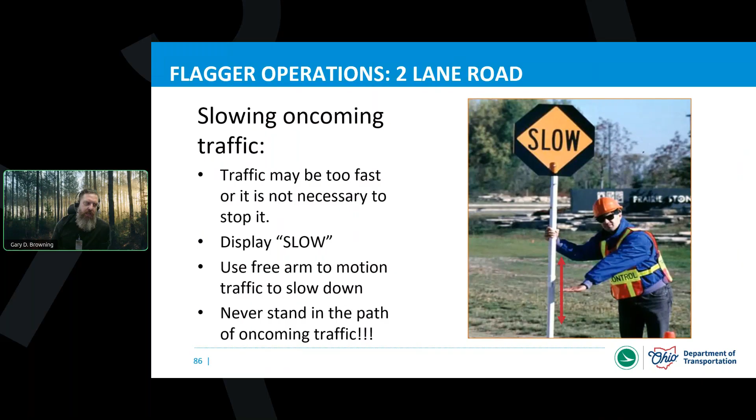Now, many of you that are listening in on the webinar today, you've probably already been in many flagging operations in the past. And you're thinking to yourself, well, Gary, there's been lots of times that I was flagging and I had cars coming through that were moving way too quickly. I had my slow paddle and I did exactly that, and they still wouldn't slow down and they ripped through the work zone at a dangerous amount of speed. What do we do? The times that I've had those types of experiences and I've sat through other flagging classes, this is something that I picked up long ago.

Remember, we don't want cars driving through at a full or excessive rate of speed, especially because what if a car loses control and they have a roadside departure right in the middle of that work area? What if somebody accidentally steps out past the double yellow line, like the story I shared in the beginning, and now you have a worker struck? We want to slow them down.

If you have vehicles that are not going to abide by that, many times the best and safest operation, if they're not responding to your slow communication, is just to take it back to a stopped point again. But if you're going to go back to a stop point with the intent of releasing them again, you have to make sure that you're communicating properly with your opposite flagger. So let's say we're using a two-way radio for communication. Grabbing my two-way radio, I call my opposite flagger and I say, I have a really fast approaching vehicle. I'm going to turn my flag back to stop. Don't release your traffic. Keep your traffic stopped as well.

The other flagger confirms that they understand the communication. They say, okay, go ahead and do that. I'll keep my traffic stopped. You go ahead and turn your paddle from slow back to stop. You go through the processes that we previously discussed to bring that traffic to a stop. And now that it's safe to release them, you can go back to turning your paddle to slow and with your free hand telling them to proceed. It's all in an effort just to try to slow that traffic down. So we're trying to minimize potential injuries, crashes, the serious injuries, and the fatalities in our work areas.

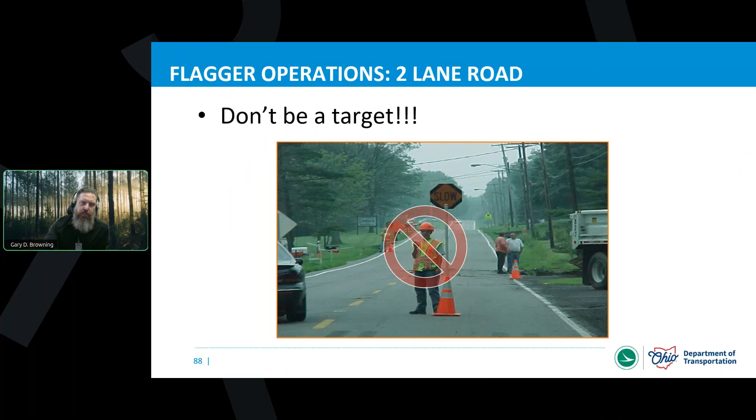You need to be able to give them the proper training because even though they said, yes, I understand, what this person's doing in the picture may be exactly what they thought they heard, even though it's not what you told them to do. So make sure you're providing adequate training. Utilize the Ohio LTAP Center. Invite me out to be your safety circuit rider. Come attend our full day work zone classes, but make sure your folks are trained in safe operations for temporary traffic control.

All right, we know there's different types of flagging operations that we can get into. It's kind of like a Dr. Seuss book if you think about it. One flag or two flag or three flag or more. There's lots of flagging operations because our variations of work are ever changing. So let's go through and just look at a few of these. We know that two flagger operations is going to be the majority of the type of flagging operations that we have. It's the most common form. There's no AFAD that's involved. That's that picture I showed you of the automated flagger assistance device.

We know that communication is absolutely essential, and usually one flagger should primarily be in charge, especially if you're on a roadway that has very low traffic. Maybe you have an occasional car that's going to come through that day. Usually that flagger that's going to be in the same side of the roadway that the work area is in is going to be the one primarily in charge, holding the stop paddle, while the other lane that is unencumbered is going to remain in a slow fashion so that traffic can proceed.

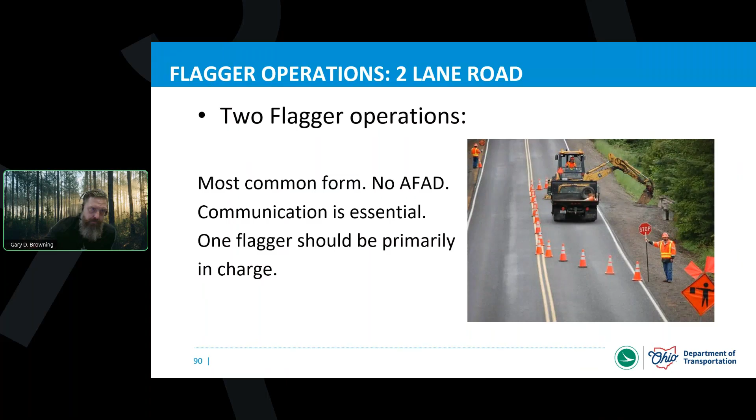But then even after that, as traffic is passing, as they're coming and going, those flaggers need to be in constant communication so that they're reading one from another when it's time to stop, when it's time to slow, to keep everybody safe. We know that with communication with flaggers, there's many different ways of doing communication, and a lot of these are identified in your MUTCD. You have the sight method, and we're going to talk about each one of these. You have the sight method, you have the use of two-way radios, and then you have a couple of the things that are probably least likely to happen, at least in the state of Ohio, but you have a flag carry method as well as pilot car method.

Now, the pilot car, we won't really get in that today. That's something that you typically see when you're much further west where you have a work zone, you have a line of cars that are stopped and queued, and you have a vehicle that is identified as that pilot, that gets in front of the line of cars. The other cars will follow that pilot car and it leads them through a work zone that may be miles and miles and miles long. That pilot car gets to the other end, they dip off the roadway, traffic proceeds on, they pull in front of the other vehicles that are waiting, and then they repeat that process. That's that pilot car mode. We typically don't see that here, but it's not to say that you may not ever.

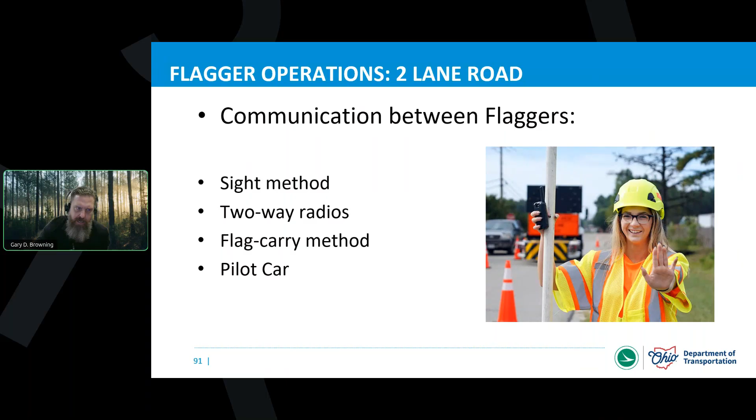So let's talk about sight method. Sight method is one of the ways that we flag quite frequently. And if we're going to do the sight method alone, you have to understand a few things. Both flaggers must have uninterrupted sight view of each other at all times. You must be able to make visual contact at all times while you're out working on that roadway.

Now, if you look at my picture and my flaggers here, they're somewhat close enough together that the sight method would work for them. But if they begin to pull other equipment in and out of that work area, the backhoe begins to swing its boom over and it's re-maneuvering something, and now the flaggers can't see each other without a flagger entering into that traveled lane to be able to see what the other flagger is doing. That is no longer going to be a sight method approved area.

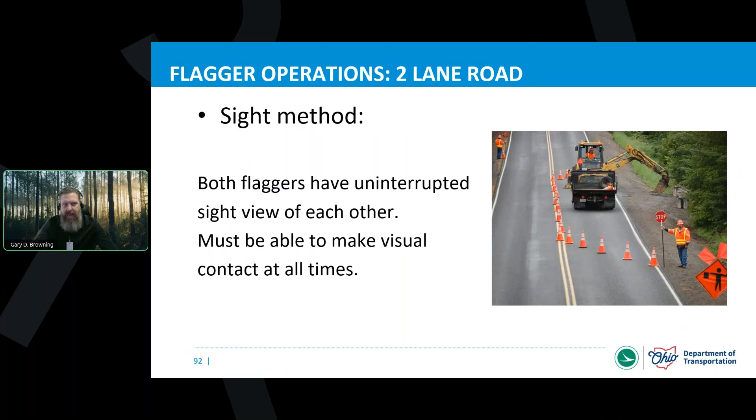It has to be uninterrupted sight view of each other at all times. So if we can't see each other at all times, or maybe at all, now we're going to get into some other type of communication, which is primarily a two-way radio method. This is going to be the most common type.

Many of our local public agencies, we buy these. Many agencies will even assign a radio to every single employee, or they'll just have maybe a small bank of them in a garage to be able to use. Radio communication is very effective for flaggers, and you have to have something like this when the flaggers cannot see each other. And if you have multiple flaggers, which we'll talk about in just a moment, every one of the flaggers that are out on the job site should have their radios with them.

Now, here's a problem that comes with batteries, and it's like anything else that takes a battery. Batteries go dead, and lots of times the batteries will sit on a charger for so long that the charger will begin to burn the cells. And so that morning, you're planning on going out to do some flagging operations. You look down at the charger, you grab your battery, the light was green, saying it was fully charged. Only you get out to the work zone, and maybe you're only 20 minutes into your day, and you go to key the mic, and it beeps at you that the battery's dead and it'll no longer work.

That's a huge problem. So we encourage everybody that if you're going to be utilizing radios for your flagging communication, carry extra batteries with you just in case the battery goes dead. Because what happens if you're relying on radio communication for safety, and for that overall communication between the flaggers, and now you don't have it? Now you have a very, very unsafe road, a very, very unsafe work zone, and you're going to have to pull everybody off that road just to be able to go back to the shop to pick up the batteries that you should have already had with you. So plan ahead, be safe, and carry extra batteries with you.

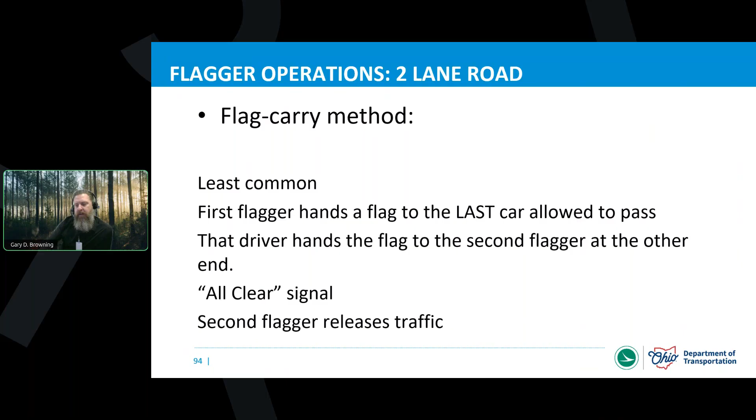Remember, if you're going to be on the roadway and you're going to be flagging, you have to be able to have proper communication. So be planning ahead to be safe and choose the right communication that's going to work for you. We also said that there are times for one flagger operations, but we know that there are a few conditions that must be met for single flagging operation.

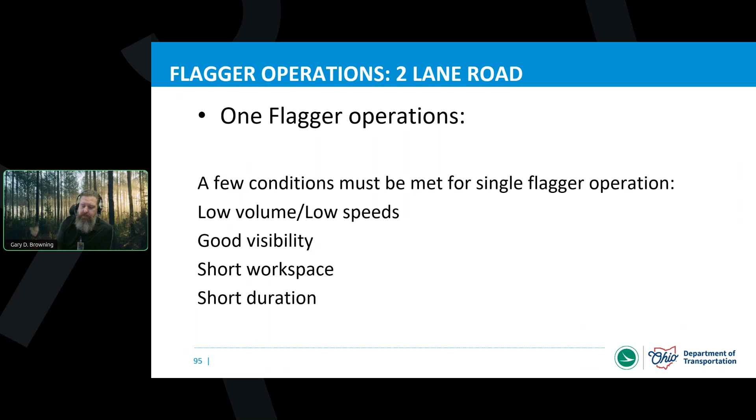Well, let me show you what legal is, because the things that you have to be aware of if you're going to do single flagger is it's got to be a low volume, low speed roadway. You need to have very good visibility, relatively a short workspace so that it's manageable by a single flagger. And then you're planning on only being there for a short duration.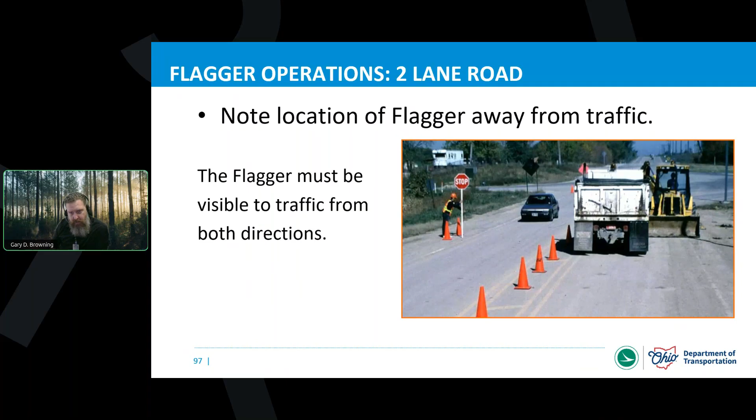So let's look at some real life pictures of what's the proper way to do single flagging. Note the location of the flagger and how they're away from traffic on the shoulder of that roadway. The flagger must be visible to traffic from both directions. That helps them have control. They can see the traffic that's coming from both sides, as well as the traffic that's coming through. The flagger is to never step into the lane of traffic.

Now, if you remember when we were talking about two flagger operations and I've got stopped traffic, let's say I've got multiple cars that are queued up in line, then if I want to step out a little bit further into the roadway so that approaching traffic can see my stop paddle a little bit easier, I can do that if I choose to.

Well, here's the thing, when it comes to one flagger operations, you never step into the roadway because that lane is always going to be a live lane of traffic, regardless of what direction. Because if you're stopping one, the others are coming through. So single flagging is never in the roadway at any time.

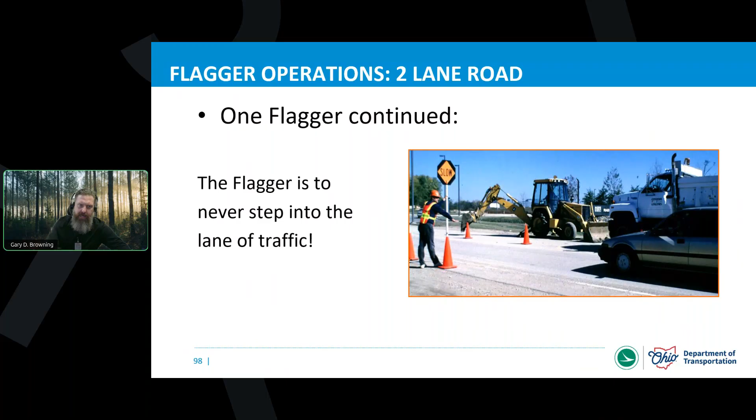But maybe really close to your work area, it may be somewhat a busy area. Maybe you've got some side roads that are intersecting into it. Maybe you have a very busy business and their driveway is right there where cars can come in and out, and it's to the degree that it's going to be a problem. These are the types of situations where I would encourage you to have additional flaggers so that we're controlling that traffic at each point that may enter into that roadway, and not necessarily just the two primary flaggers.

But you better believe it, communication is a must. Each one of these flaggers are going to need to have some form of a radio so that they can talk, so that when it's time for us to send traffic eastbound, only eastbound traffic is going to move. If somebody's wanting to turn west when we're sending them east, you got to be able to stop them to prevent a head-on collision, especially when we're talking about being right there around that work area. So communication is absolutely a must. When we're sending traffic east, everybody's east. When we're sending them west, everybody's west.

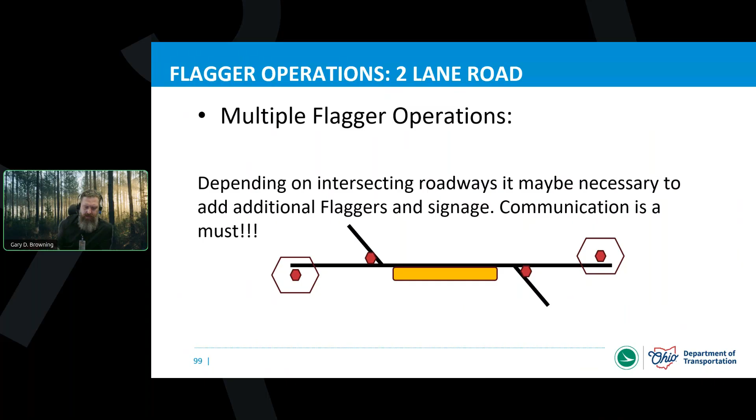More special situations that we can deal with, we talk about with advanced flagging. So sometimes we may have to actually stop each vehicle. Maybe you're out responding to some type of an emergent event, and there's a situation that's going to require you to give each car specific situations to advise them of what the situation is ahead. Be very cautious if you're ever in this situation, because remember, now that's putting you very dangerously close to the edge of that roadway and vehicular traffic.

Always be alert and be considerate as you're giving the instructions and whatever it is that you have to share. Let it be very short. Avoid the unnecessary conversations. I know that might be hard in some of the smaller communities, especially if the people driving through may know you and may want to get into sidebar conversations, but you got to keep it moving. You got to keep yourself safe. Be alert, be considerate, avoid unnecessary conversations, and take care of what you're doing.

We know that our circular intersections are becoming more prevalent throughout the state as well as throughout the country. And so let's take a look at it. We're talking about one flagger, two flaggers, three flaggers, and more, right? Here's an opportunity. Let's say you have a work that you have to go into. You got a single lane roundabout, and maybe there's some type of inspection or a maintenance operation or emergency that you're responding to. And now you're thinking, well, how are we going to control this circular intersection? How are we going to control this roundabout? You have several new typical applications that are available to be able to help you.

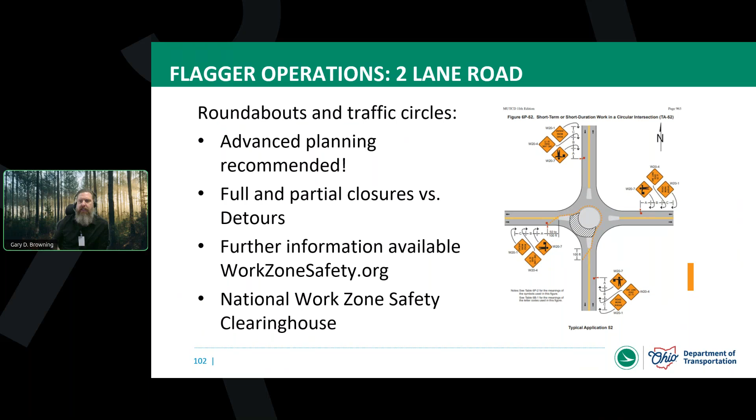We know that when we're dealing with roundabouts and even single lanes, we'll even consider looking at doing full and partial closures versus doing detours. Maybe it's a point where you're not real comfortable with it and you want to do a detour instead to completely close the intersection and reroute traffic. The MUTCD would walk you through the appropriate measures for how to safely and legally deploy your detours. So those are things to consider. If you would like to find further information, there are some other typical applications available in the newest rendition of the MUTCD, but you can also look at workzonesafety.org and you can go to the National Work Zone Safety Clearinghouse for more information on these topics.

Maybe legitimately they could actually be stationed up there on the north end of those tracks. That would be an improper flagging location. And this is why. This is one of those times where you're going to want to take that tangent line of your work zone, that straight section that's going down the double yellow line, and extend it and make it much longer. Put your flagging location south of those tracks, because here's what we don't want to have happen.

Now, as the approaching traffic is stopped, there is no possible way that they're ever going to get placed on the tracks where they're not able to completely go all the way across those tracks. So be very safe with those things and think about that.

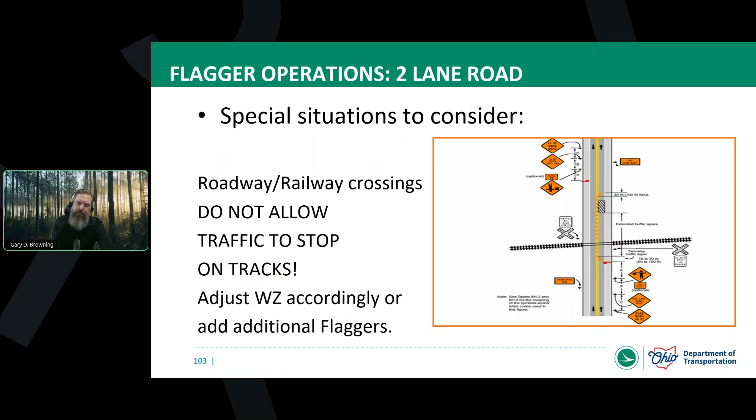Continuing talking about our special situations, there are our night operations. And we've already talked about this a couple of different ways, especially when we were talking about our reflective garments. But with night operations, our procedures are generally going to be the same as daytime operations with a few equipment changes. And some of these things you and I had already kind of identified.

We talked about having a flashlight with a glow cone, or maybe taking a lantern out, making sure that we have the proper ANSI reflective vest. And we said that was Class 3 for nighttime operations. Having that retroreflective paddle, the stop and slow paddle, so that it's better seen. And if this is planned work, you have to have auxiliary lighting. So having some type of a light plant out to illuminate the flagger locations so that they can be seen properly to be able to be kept safe.

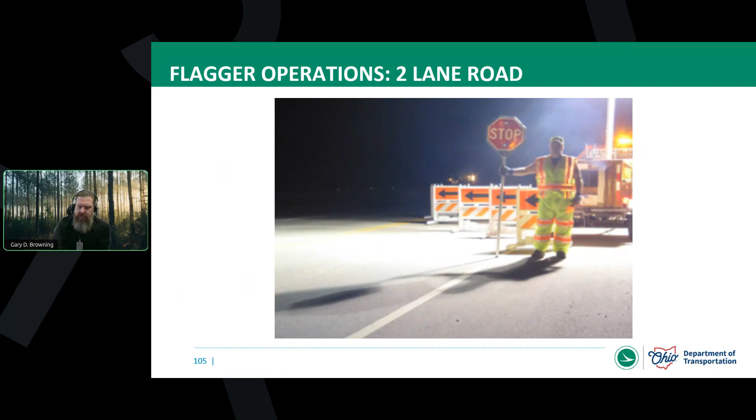Let's continue talking about our special situations to consider. What about the times that we find ourselves in a position where now we're at a signalized intersection? What should we do? What's going to be best? What's required? What is prohibited? So signalized intersections in the workspace can be a very special thing, a very special situation. This is going to be the best use for your law enforcement officers.

If you're going to find yourself having to work in or around a signalized intersection and you're in a position where you're talking about flagging operations, try to reach out to those LEOs, reach out to those deputies, see if you can get that help. But here's what we have when we start looking at our Manual on Uniform Traffic Control Devices. You shall not flag traffic in a signalized intersection unless the traffic signal is completely inoperable or has been specifically set to a flashing red light.

It is considered unsafe and it can confuse drivers due to the conflicting signals. So you have a regulatory device overhead. You have that signalizing device. And then you have a flagger standing down below it. It has a regulatory stop sign attached to their paddle. And which one does the driver listen to? Which one are they supposed to obey? You can see how that would be very conflicting and that it could cause issues very quickly. So use caution, make sure that you're abiding by the MUTCD, reach out to your local partners with your law enforcement officers to try to get you the additional help that you need if you're put in these situations.

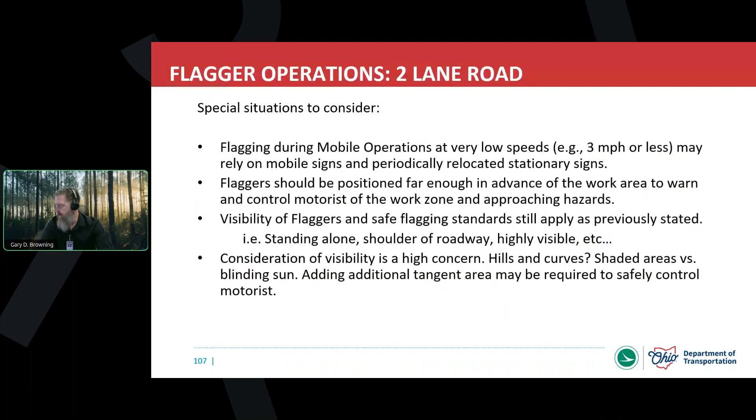We know that the additional special situations to consider when we're talking about our moving and mobile operations is shadow vehicles. Having shadow vehicles equipped with warning signs for mobile operations is highly advisable, and they're going to be required for high-speed roadways. So let's think back to that again just a minute. We were talking about going in and doing a road repair. Maybe we're doing a moving or mobile operation and we're dealing with hills and curves. And I said sometimes, depending on the amount of curves and hills that you've got, that flagger may have to retain his or her position on the edge of that roadway in advance of the hill, in advance of the curve, while that working procession is moving further and further away.

This is where shadow vehicles are going to be very helpful, because now you can still keep a shadow vehicle that's going to be sitting right with the actual work area where the mobile work is going on, and they will be able to be there to be kind of that buffer, if you will, especially if they have a truck mounted attenuator on them as well.

Truck mounted attenuators are highly advisable. Typically, when we see typical applications, they may be listed as optional. But again, even if you're choosing a typical application that has something listed and it says that it's optional, that doesn't mean you don't have to do it. It's going to be highly advised that you still do to be able to provide that necessary protection.

The shadow vehicles, on the back of your shadow vehicle, having the appropriate warning sign. Even something as small as going out and doing roadside mowing, you've got a truck that's following the tractors while they're making their first initial cut on the edge of that roadway, and maybe the sign on the back of that truck says road machinery ahead or mowing ahead. This is the type of thing that we're talking about. Your shadow vehicles being equipped are very helpful.

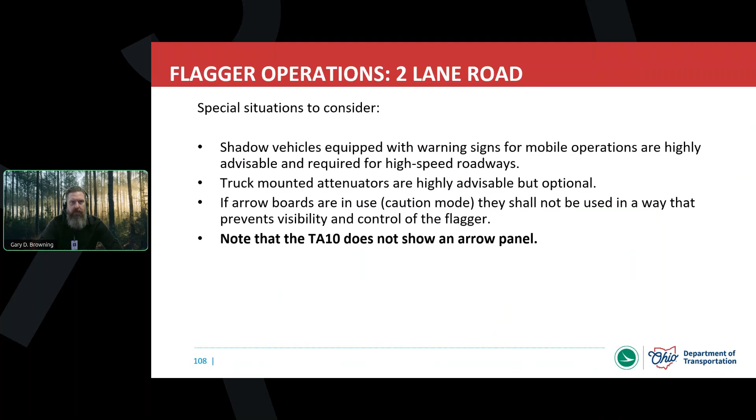Additional special considerations. How about emergency vehicles or fire apparatus, EMS, law enforcement officers? Have you ever been out flagging on a job site and while you were flagging, you were surprised by an approaching emergency vehicle? That can be very scary for the flaggers. That can be very scary for the approaching fire and EMS folks that are coming up the roadway, or the law enforcement officer. There's a few things that we need to think about in the event that we are presented with something just like that.

When they're approaching, try to allow them the right of way as soon as possible, but stop them if it's not safe to allow passage. Let me play this out and paint a picture in your mind. If you're doing a flagging operation and you have active traffic in that work zone that is going to be opposing the safety vehicle that is coming through, and it could end up being a head-on collision, and there's no way for them to safely pass, hold your stop sign out, but communicate very quickly to your opposite flagger: Hey, I've got an emergency vehicle up here that's fast approaching me. Stop your traffic. Don't let any more in here.

And whatever that last car is, as soon as that last car is out of the work area, then get the fire, get the emergency vehicles, the law enforcement officer, give them the right of way so that they can get through the work zone to respond to wherever it is that they're going. But here's a better approach.

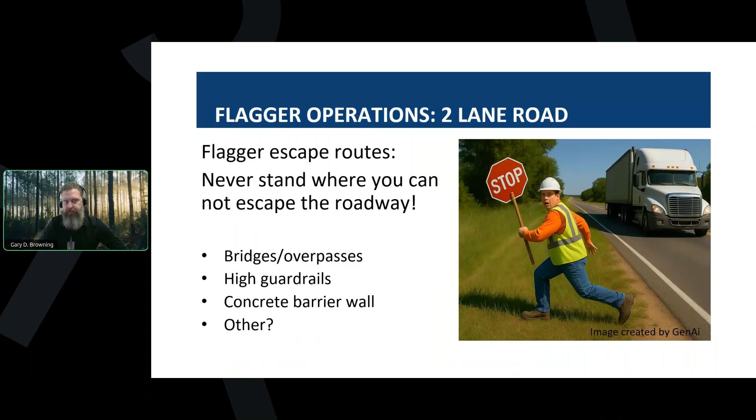Now, you heard me talking about handling these emergency situations. Let's say something bad happens. We're talking about anticipating the unexpected, and now something happens. Obviously, we want to call for help. You want to call 911 as soon as it's feasible to do it, notifying your supervisor so that they're able to respond and come out to see what's going on, trying to document the things that are happening. Remember to protect yourself first and foremost.

But now that the crash has happened, what do we do? Do we drop the flagstaff and forget about the roadway? Do we run off out into the bean field with a rush of adrenaline because we're trying to be a good Samaritan while now the traffic and the roadway is unattended? We can't do that. You've got to continue to control your traffic because here's the problem. Now you've got this crash, and maybe the crash was a roadway departure, and it's bad, right? Crashes are never a good thing.

So now you're dealing with this crash, but now you're going to have a roadway that is unprotected and uncontrolled by flaggers. Now you have vehicles that are still going to be driving up that roadway, potentially opposing one another for an additional head-on collision. And you know as well as I do that when drivers see a crash, what do we all do? We're guilty of it. We rubberneck. People are turning to see whatever happened. And now you have that opportunity for secondary crashes.

When you start studying safety and looking back statistically at crashes on the roadways and on job sites, typically that first crash ends up just being some type of property damage. But your secondary crashes statistically become more severe, if not fatal. So at this point, you're trying to control or eliminate the opportunity for there to be a secondary crash. So listen, control that traffic, continue to control that roadway.

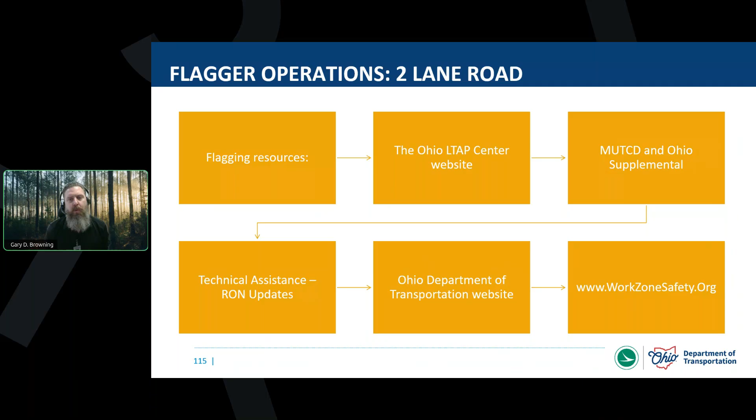Downloading copies of that MUTCD and the Ohio Supplemental are available. We have technical assistance updates with RON updates that are out there, many different topics that are available, even things to help you with like tailgate safety talks. The Ohio Department of Transportation website has many resources that are available for you as well. And we also reference workzonesafety.org. All these things presented to you in an effort to help you be more knowledgeable and to be more safe as you're out working in your work zone operations.

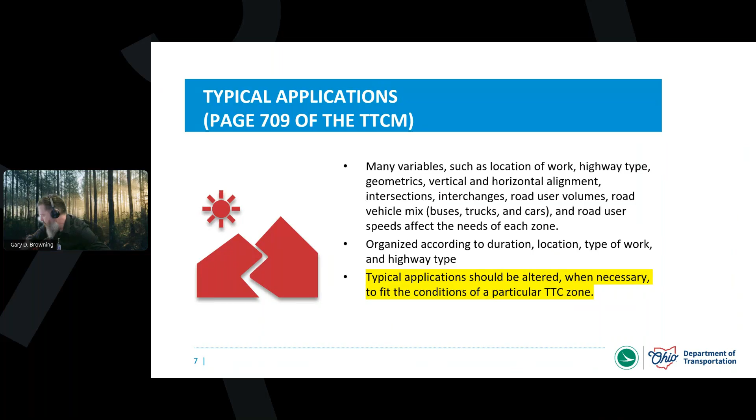All right, right on. Okay, I am seeking clarification for a question that came in, because at the beginning of the question, this person is asking you, Gary, if you can bring up the slide that talked about flagging at an intersection. So I am working on getting clarification if they just want to see it again or if they have a question that goes along with that slide. Okay, I'm going back to find it here.

Typically, what I would have done in the community I was in, if we had to work in or around an intersection, especially if it was inoperable, let's say power goes down, something's wrong with it, and now we've got to be in there to do some type of work, the best bet was to haul out temporary stop signs and make it an all-way stop to help control that traffic.

So you get your all stop signs out there, and then you're performing whatever you have. But when we're talking about intersections, especially intersections that might be a little bit busier, it's going to be the best use to try to utilize a law enforcement officer to help you stay safe. The problem is that if you've got an active intersection signal that is working, from my understanding of talking to our folks in transportation, it is going to trump that flagger that is actually flagging. You're not going to be able to flag over top of it. It's going to basically take that primary control away from you.